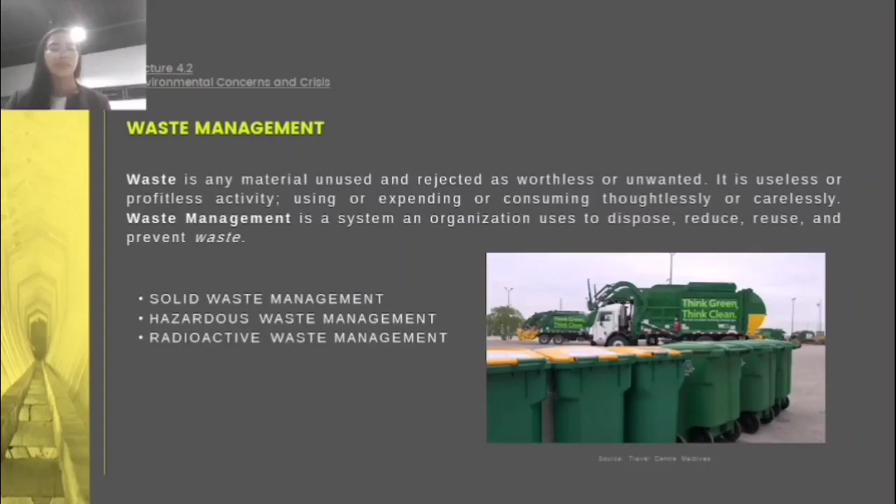So there are three classifications of waste management: solid waste management, hazardous waste management, and lastly, radioactive waste management. So what is solid waste? It is non-liquid, non-soluble materials ranging from municipal garbage to industrial waste that contain complex and sometimes hazardous substances, where solid waste management is a management system to utilize solid waste in the most effective combination of management options to handle waste or waste streams within the confines of applicable regulations.

So, such solid waste is often called municipal solid waste, or MSW, and consists of all the solid and semi-solid materials discarded by a community. MSW comes from residential, commercial, institutional, and industrial sources. Residential waste constitutes the bulk, which is 56.7% of MSW, and includes kitchen scraps, yard waste, paper and cardboard, glass bottles, plastic containers, and even sandbags.

Then, commercial sources, which include commercial establishments and public or private markets, contribute 27.1%. In some regions, about two-thirds of commercial waste comes from the latter, and institutional sources such as government offices, educational and medical institutions account for about 12.1%, while the remaining 4.1% is waste coming from the industrial or manufacturing sector.

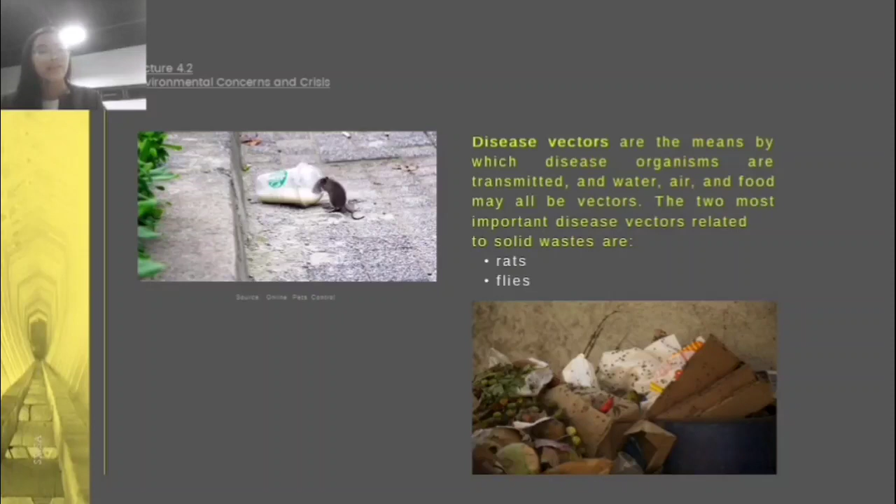So therefore, the relationship between solid waste and human disease is intimate and obvious but difficult to prove. If, for instance, a rat is sustained by an open dump and that rat sustains a flea that transmits murine typhus to a human, the absolute proof of the pathway would require finding the particular rat and flea, an obviously impossible task.

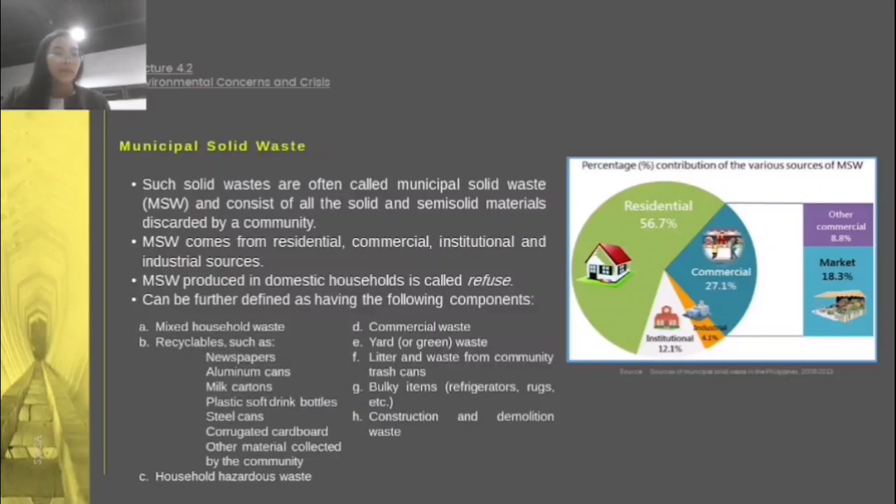So, the characteristics of municipal solid waste involve gross composition, moisture content, analysis of particle size, identification of individual components that make up the MSW, and the density of solid waste. Refuse management depends on both the characteristics of the site and the characteristics of MSW itself. MSW produced in domestic households is also known as refuse, so sometimes refuse management and municipal solid waste can have the same meaning.

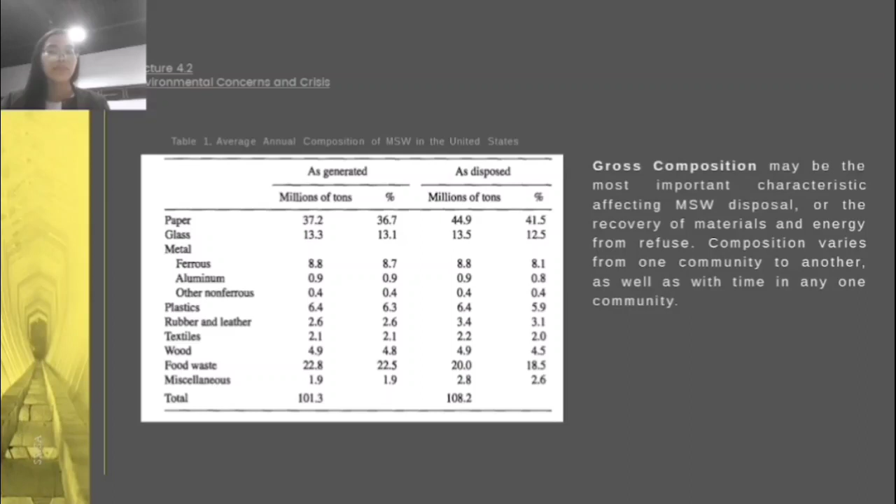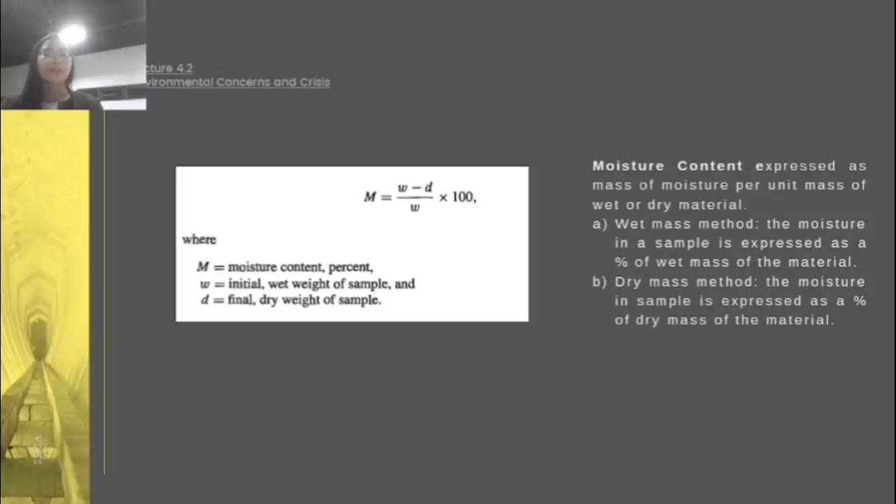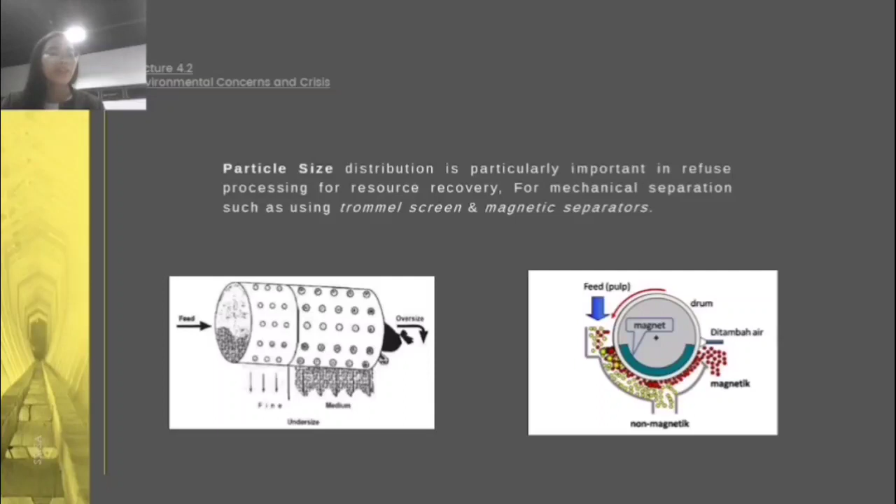So gross composition may be the most important characteristic affecting MSW disposal. Moisture content is expressed as the mass of moisture per unit mass of wet or dry material. Then the particle size distribution is particularly important in refuse processing for resource recovery, for mechanical separation, such as using trommel screens and magnetic separators.

The fourth one would be the chemical composition of typical refuse, which uses both proximate and ultimate analysis in the combustion of MSW. Then lastly, one of the characteristics of MSW is the density, which varies greatly with geographic location, season of the year, and length of time of storage.

Collections are facilitated by using containers that are emptied into the truck with a mechanical or hydraulic mechanism. So these are the different transportations that are used to collect solid waste, for instance, the garbage grinder, the kitchen garbage compactor, the transfer station, and many more.

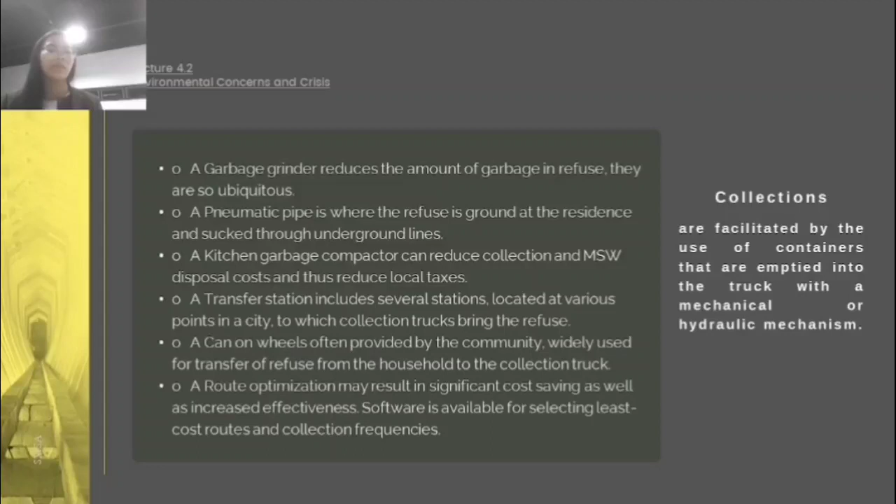So, processing and beneficial use. Processing reduces the volume of materials to be landfilled and can create products such as fuels, oils, and steam for electricity generation. And beneficial use means the reuse of solid waste as a substitute for raw material in manufacturing, as construction material, as a fuel, or as an agronomic soil amendment.

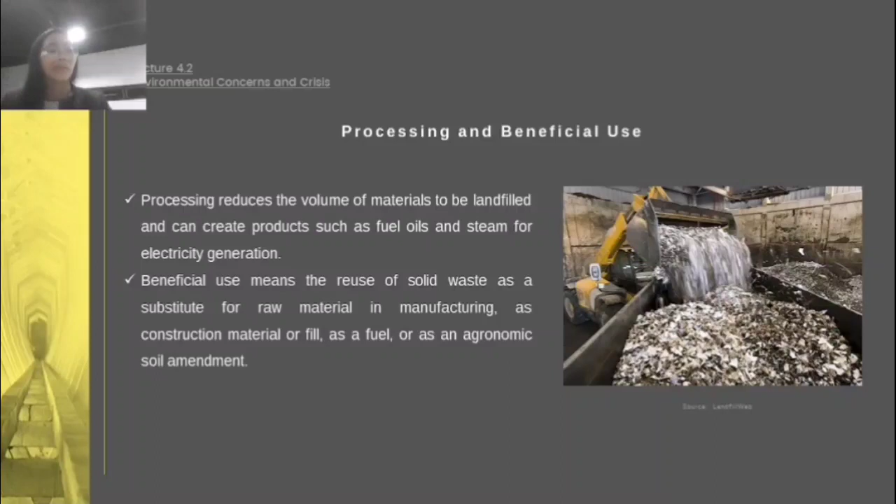So the solid waste problem has three facets: the source, collection, and disposal. So the first is perhaps the most difficult, and a new economy of reduced waste, increased longevity instead of planned obsolescence, and thriftier use of natural resources is needed.

So one of the subtopics of solid waste management would be solid waste disposal, wherein the disposal of solid waste is defined as the placement of the waste so that it no longer impacts society or the environment. The wastes are either assimilated so that they can no longer be identified in the environment, as by incineration to ash, or they are hidden well enough so that they cannot be readily found. So solid waste may also be processed so that some of its components may be recovered and used again for beneficial purposes.

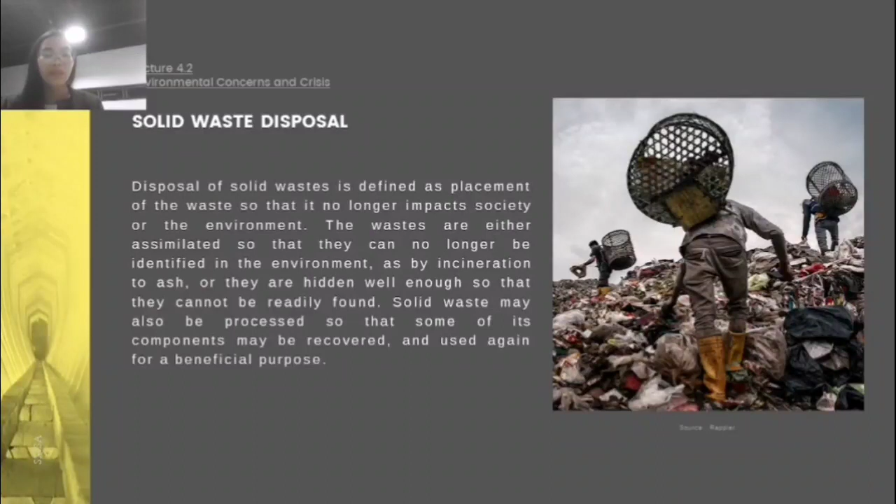So it is regarded as the least preferred method of managing solid waste, although it plays an important role in dealing with residual waste. There are only two realistic options for disposal. They are disposal in the ocean and on the land, and the environmental damage done by ocean disposal is now understood. So the term sanitary landfill was first used for the method of disposal employed in the burial of waste ammunition and other material after World War II.

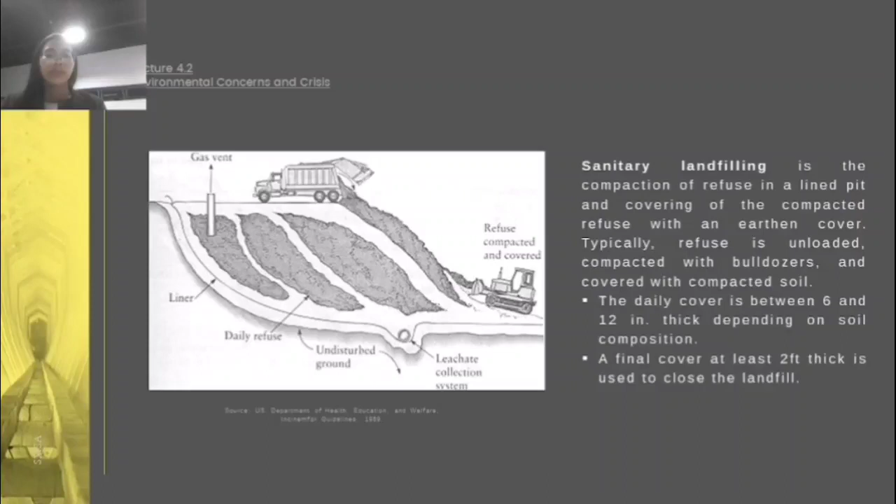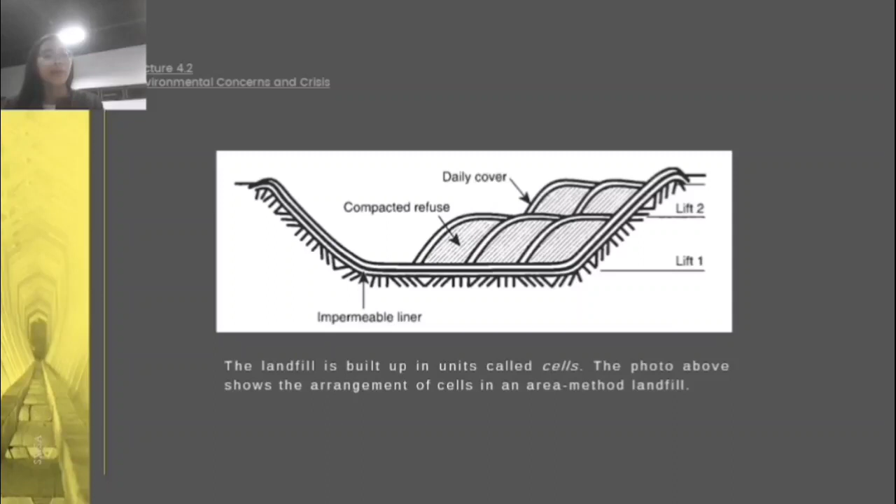They are called cells. So another aspect of solid waste disposal is siting landfills, which is rapidly becoming the most difficult stage of the process since few people wish to have landfills in their neighborhood. In addition to public acceptability, considerations include the drainage, the wind, the distance from the collection, the size, rainfall patterns, soil type, depth of the water table, treatment of leachate, and proximity to airports. And lastly would be the ultimate use of the landfill site.

In modern civilization, however, adequate disposal is becoming increasingly difficult. The disposal methods discussed in this topic are only partial solutions to the solid waste problem. Another solution would be to redefine solid waste as a resource and to use it to produce usable goods. And this idea is explored in the following slides.

So the defining objective of solid waste disposal is the placement of solid waste so that it no longer impacts society or the environment. At one time, this was fairly easy to achieve. Dumping solid waste outside the city was also quite adequate. But again, the disposal methods discussed here are only partial solutions to the solid waste problem, and there are other solutions that could be implemented, such as the 3 Rs, which are reuse, reduce, recycle.

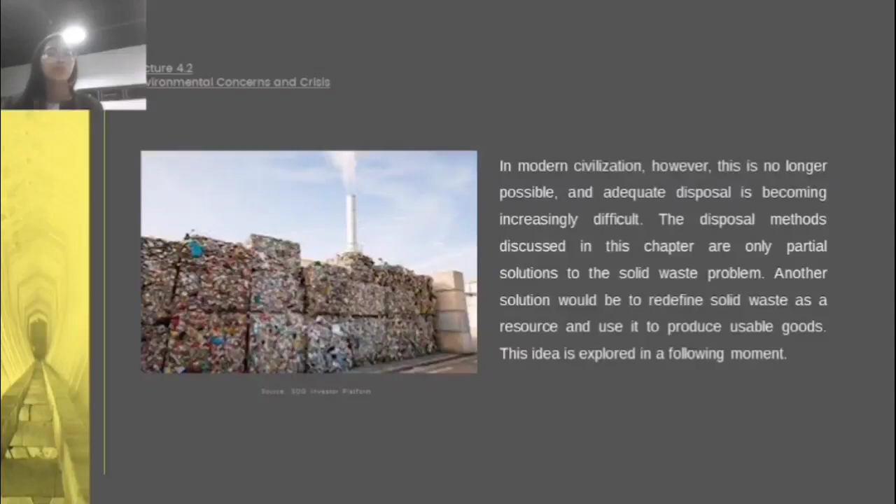Reuse, recycling, and resource recovery. So waste generation has increased exponentially with the rise of the population's economic situation and the materialistic nature of society. So this makes the selection of solid waste disposal sites more difficult and problematic. So as a result, society's interest in reuse, recycling, and recovering materials from waste has grown. However, the differences between these three elements are oftentimes confusing and sometimes misused.

So when we say reuse, it involves either the voluntary continued use of a product for a purpose for which it may not have been originally intended, or the continuous use of the product itself. So it is the act of taking old items that you might consider throwing away and finding a new use for them, using resources in a new way once we have finished using them for their original purpose. So an example of this are these empty cans. Instead of throwing these items out, we can think of a new way we could use them. For example, we can use them as a plant holder or as a utensil holder.

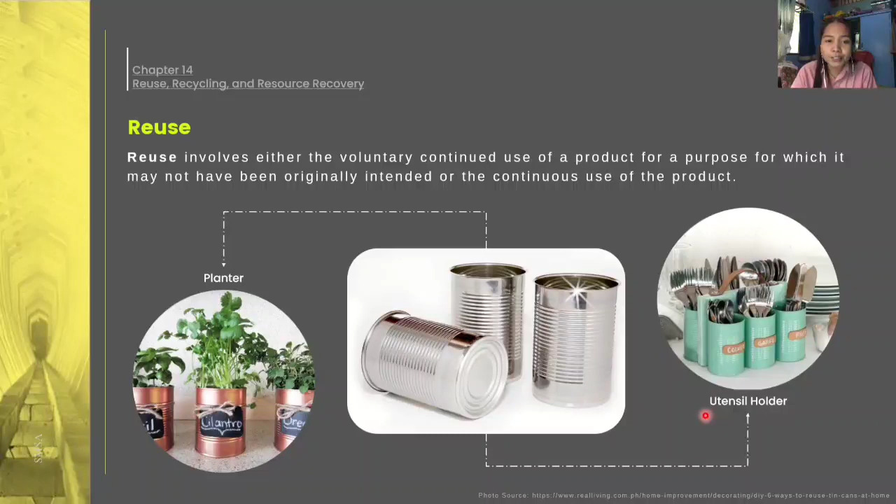So the second element is recycling, which is probably the most well-known and well-understood among these three. So it is the act of turning waste into a new substance or product, in which the materials are carefully separated and later processed into other goods which will be returned to the industrial sector. So the recycling process requires the participation of the public, since the public must perform the separation process.

So there are two ways that can be used to increase public participation in recycling, which are the regulatory or democratic. So when we say regulatory, the government has the power to dictate that only separated materials will be picked up at each household.

However, in democratic countries like the United States, this type of approach has limited success since it causes public resentment. On the other hand, the democratic approach appeals to the sense of community and to growing concern about environmental quality. However, householders respond positively to surveys about prospective recycling programs rather than actively participating in source

or waste separation. So based on the survey results, it can be concluded that participation in source separation can be increased by making source separation easy. So an example of this is Seattle, which is a city in Washington. They have 100% participation in its household recycling program.

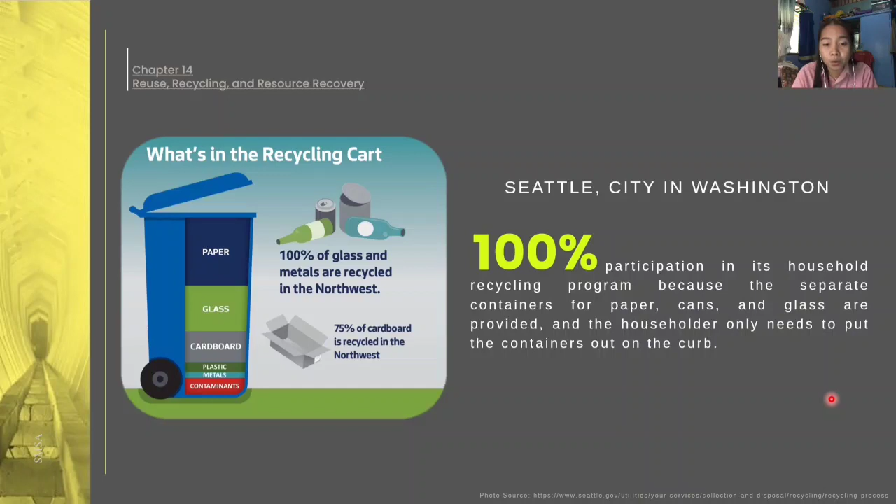So in the city of Albuquerque, they sell large plastic bags to hold aluminum and plastic containers for recycling. However, these initiatives are costly for each household since each household must buy plastic bags which cost 10 cents each just for recycling purposes.

So no matter what initiatives a state or a city could make, we can only say that a recycling program is a success or not through the availability of markets that would buy these separated recyclable materials. So for example, there are markets that buy recyclable materials, such as junk shops. So it is a necessity that a recycling program should be linked to a market for the recyclable materials collected. Otherwise, these materials will still end up in the landfill site.

So now the question is, how can markets for recyclable materials be created? Simply, they can be created by public demand. So the third element is recovery. Recovery is using mixed waste refuse as an input material to create valuable products as new outputs. There are various processing steps to create new material from mixed refuse waste.

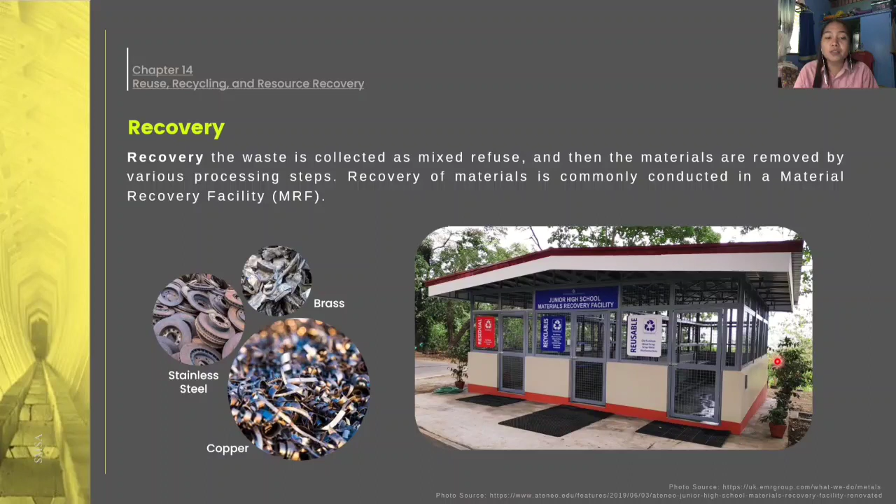So the first step in a solid waste processing facility for recovering material is size reduction, or what we call shredding. Shredding is a brute force breaking of particles of refuse by swinging hammers in an enclosure. There are two types of shredders used in solid waste processing: vertical and horizontal hammer mills.

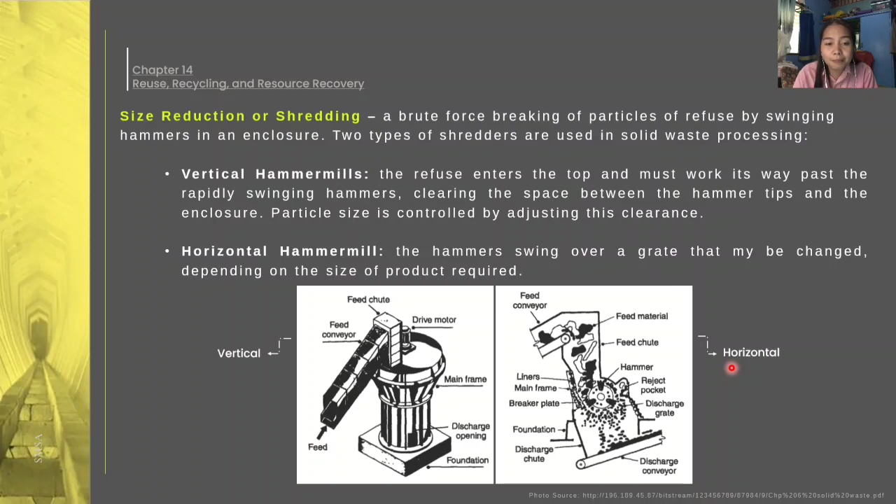So next is shredder performance and design. The performance of a shredder is assessed by the degree of particle size reduction achieved, then compared with the cost in power and shredder wear.

So the particle size distribution of a non-homogeneous material such as municipal solid waste can be expressed using the Rosin-Rammler distribution function, expressed in equation number 1, where y is the cumulative fraction of particles, n is a constant, and x sub c is a characteristic particle size.

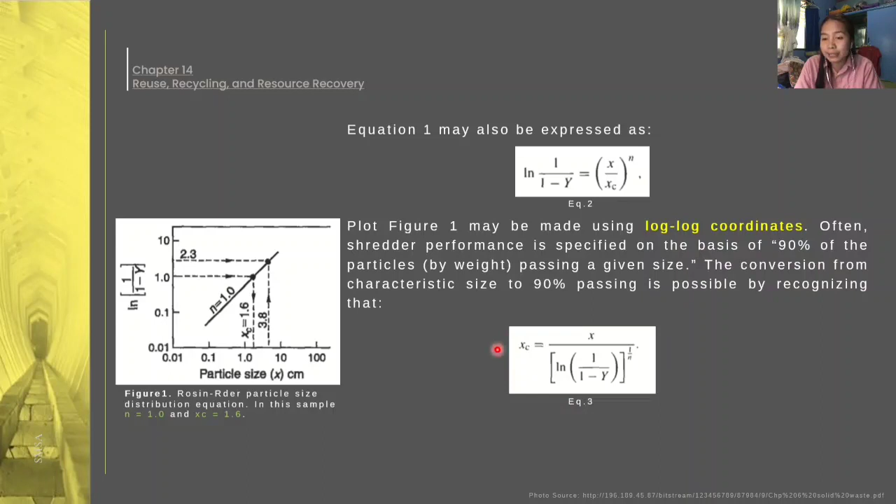So in this sample, the n as a constant is equal to 1 and the x sub c is equal to 1.6. So this plot, figure 1, may be made using log-log coordinates. Often, shredder performance is specified on the basis of 90% of the particles passing a given size. The conversion from characteristic size to 90% passing is possible by recognizing this equation number 3.

A semi-empirical equation developed by Bond is also used to estimate the power requirements for shredders. This equation number 4 can estimate the power required for shredders. W is the specific energy required to reduce a unit weight of material 80% finer than some diameter L sub f to a product 80% finer than some diameter L sub p.

Where W sub i is the Bond work index, which can be seen in table 1. Table 1 shows the typical Bond work indices. Each material depends on location, but in this table most are materials present in Washington. The factor 10 here also corrects for the dimensions. Typical values of the Bond work index for MSW and other specific materials are given in this table.

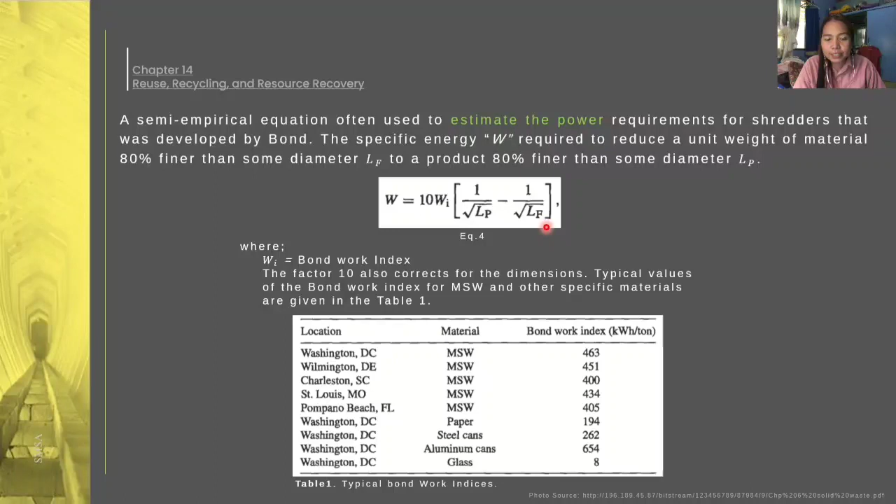Both L sub p and L sub f must be in micrometers. Example number 1: determine the power required for shredding the waste with the following particulate. L sub p is equal to 2 centimeters, L sub f is equal to 30 centimeters, and the Bond work index is 400. Also, determine the power for processing 100 tons per day of waste.

The solution uses equation number 4. Energy, denoted as W, is equal to the constant 10 multiplied by the Bond work index, 400, times 1 over the square root of L sub p minus 1 over the square root of L sub f. Since L sub p and L sub f are in centimeters, we need to convert them into micrometers: 0.02 times 10 to the 6th and 0.3 times 10 to the 6th. Calculating, we get 20.98 kilowatt hours per ton.

For the second question, to determine the power for processing 100 tons per day of waste, we multiply W by 100 tons per day, where one day is 24 hours. So 20.98 kilowatt hours per ton multiplied by 100 tons divided by 24 hours gives a power of 87.42 kilowatts. Don't forget that we should always convert L sub p and L sub f into micrometers.

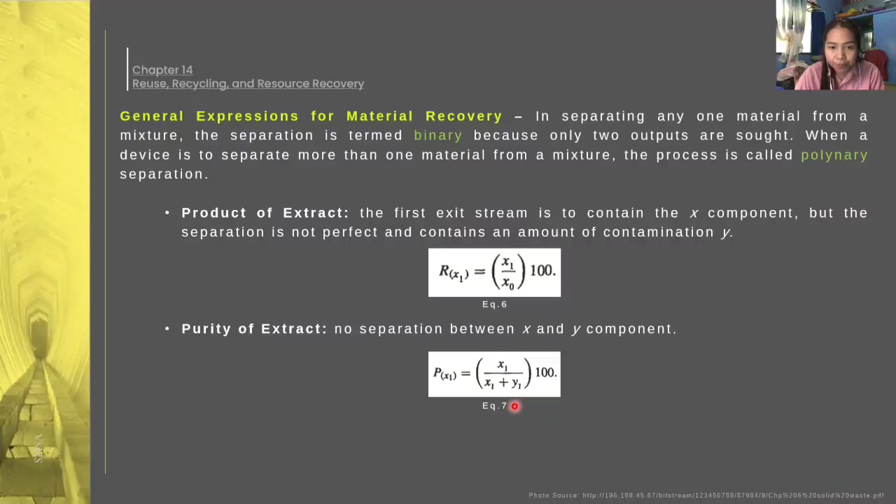The percent of x recovered in this first stream, r x sub 1, may be expressed as equation number 6. In cases where there has been no separation of the x and y components in the mixture, the stream's purity of extract may be defined by the 7th equation. However, if a separator extracts only a small amount of pure x and more contamination of y, then the performance of a material separator is assessed by both recovery and purity. This may be characterized by an additional parameter called the separator efficiency.

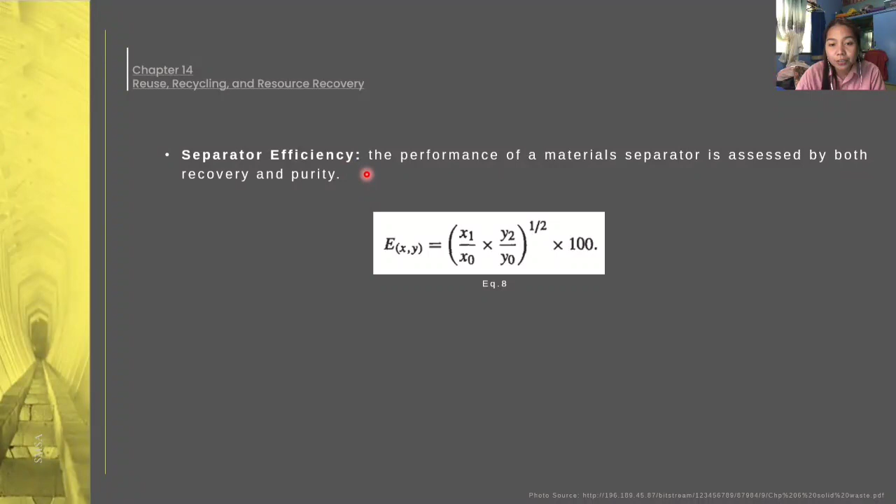For example, a binary separator, a magnet, is to separate a product, ferrous materials, from a feed stream of shredded refuse. The feed rate to the magnet is 1000 kg per hour and contains 50 kg of ferrous materials. The product stream weighs 40 kg, of which 35 kg are ferrous materials. What is the percent recovery of ferrous materials, their purity, and the overall efficiency?

Using the product or extract formula, given these numerical values, we just plug them in.

So the product of extract is equal to x sub 1 over x sub 0 multiplied by 100. So 35 kilograms divided by 50 kilograms times 100, so the units cancel out. So the product of extract now is equal to 70%. Next is the purity of extract: x sub 1 divided by x sub 1 plus y sub 1, multiplied by 100. So we have a purity of extract of 88%.

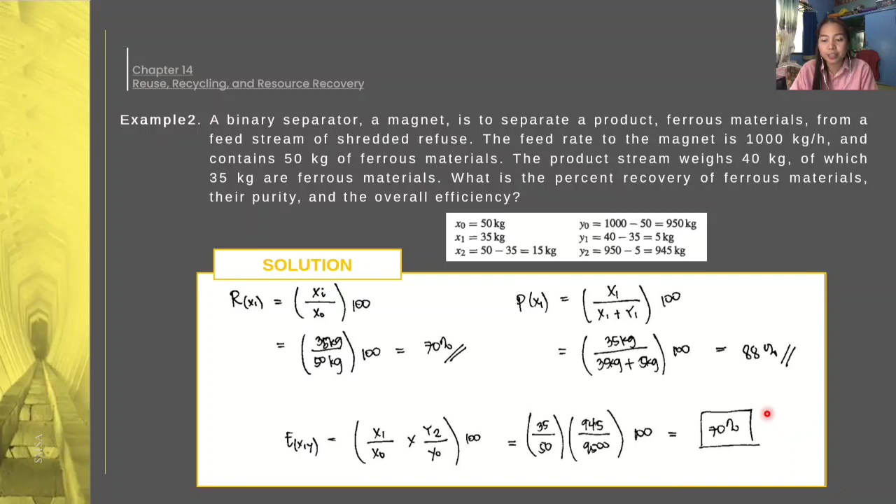Screens can separate materials solely by size, so they do not identify the material by any other property. Screens are most often used in materials recovery as a classification step before a material separation process. An example of the most widely used screen in materials recovery is the trommel. The trommel behaves in 3 different ways.

First is cascading, which is at low speed, so the material simply rolls back. Cataracting is at higher speed, in which centrifugal force carries the material up the side and it falls back. The third way is centrifuging, at even higher speed, in which material adheres to the inside. So we have here an example.

Find the critical speed for a 3-meter diameter trommel. Using equation number 9, we can compute the critical speed. Given the 3-meter diameter, the formula uses the radius. Since diameter is given, we divide it by 2 to get the radius and convert it into centimeters, since the radius of the drum must be in centimeters in the formula.

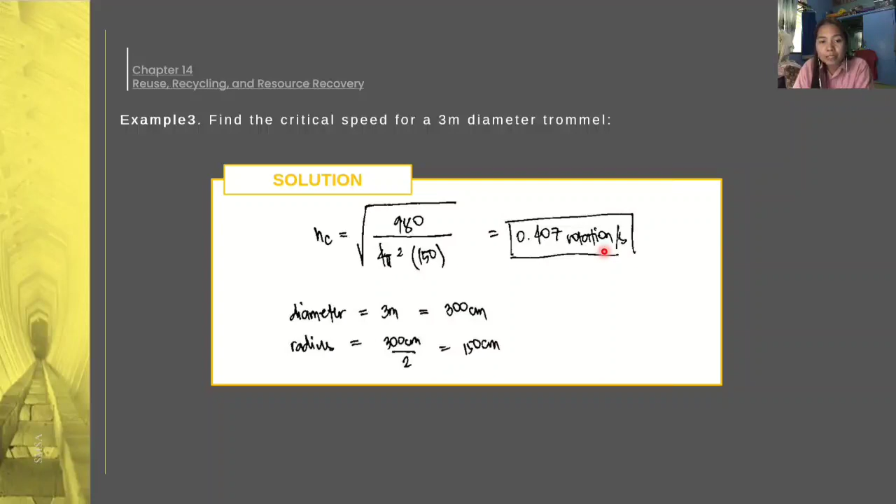Next is air classifiers. Materials may be separated by their aerodynamic properties. In shredded MSW, or municipal solid waste, most of the aerodynamically less dense materials are organic, and the denser materials are inorganic. So we can conclude that air classification can produce a refuse-derived fuel, or RDF, superior to unclassified shredded refuse. Here's figure 3, the air classifier.

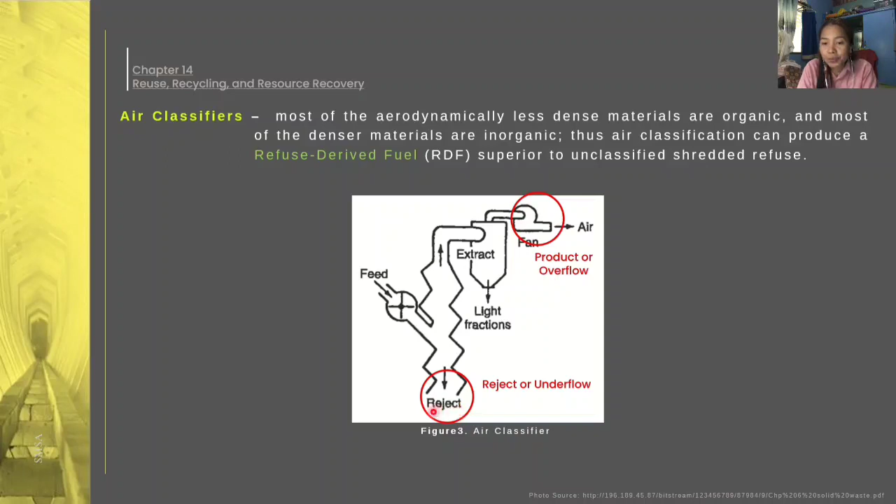We can see here the fraction keeping with the airstream is what we call the product or overflow. But if the fraction falls out of the bottom, it is a reject or underflow. There are two factors that influence the recovery of organic materials by air classification.

First, not all organic materials are aerodynamically less dense, nor are all inorganic materials denser. So complete separation of organic from inorganic material can never occur regardless of the chosen air velocity. Second, perfect classification of more and less dense materials is difficult because of the stochastic nature of material movement in the classifier.

Next are the magnets. Ferrous material may be removed from refuse using magnets, which continually extract the ferrous material and reject the remainder. One example of a magnet that removes ferrous materials is the belt magnet. It enhances the recovery of ferrous material, but its placement can decrease the purity of the product.

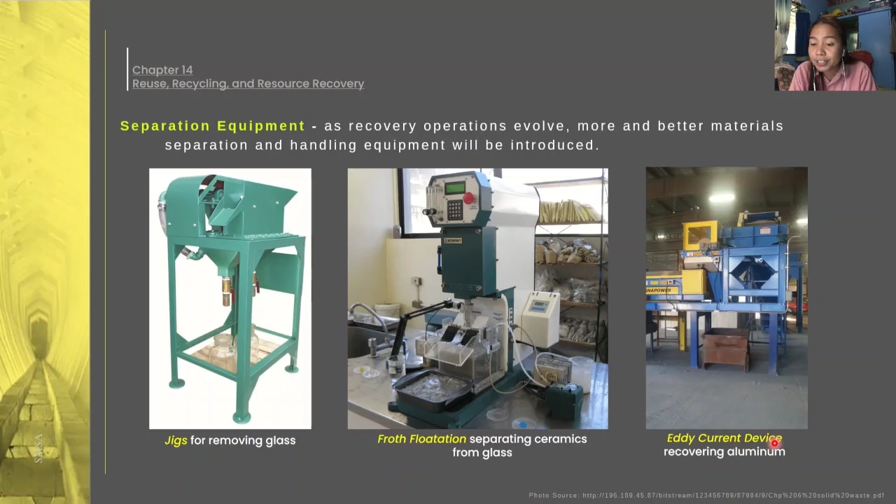Next is separation equipment. As recovery operations evolve, more and better material separation and handling equipment will be introduced. Here are different examples of separation equipment. These include jigs, used for removing glass, froth flotation for separating ceramics from glass, and eddy current devices for recovering aluminum materials.

Next is energy recovery from the organic fraction of municipal solid waste, or MSW. The organic portion of waste makes an excellent secondary fuel called refuse-derived fuel. It can be used in current electric generating facilities as shredded and classified fuel, either as a fuel substitute for coal or as the only fuel in particular boilers.

Once hydrocarbons are oxidized with other components of the fuel such as nitrogen and sulfur, different chemical reactions can form. Nitrogen dioxide is an important component in the formation of photochemical smog. However, if particles form into sulfur dioxide, it can damage both human health and vegetation. How much more if sulfur trioxide reaction is formed - this is where acid rain forms, by the reaction of these chemical compounds.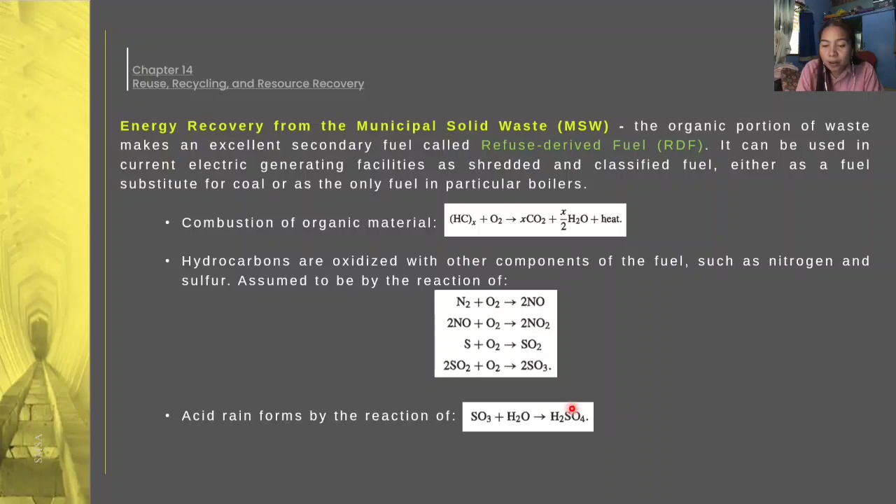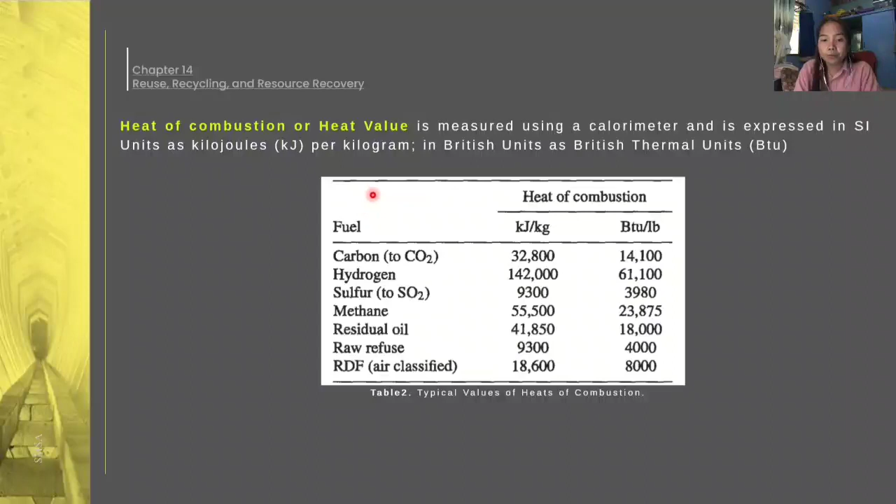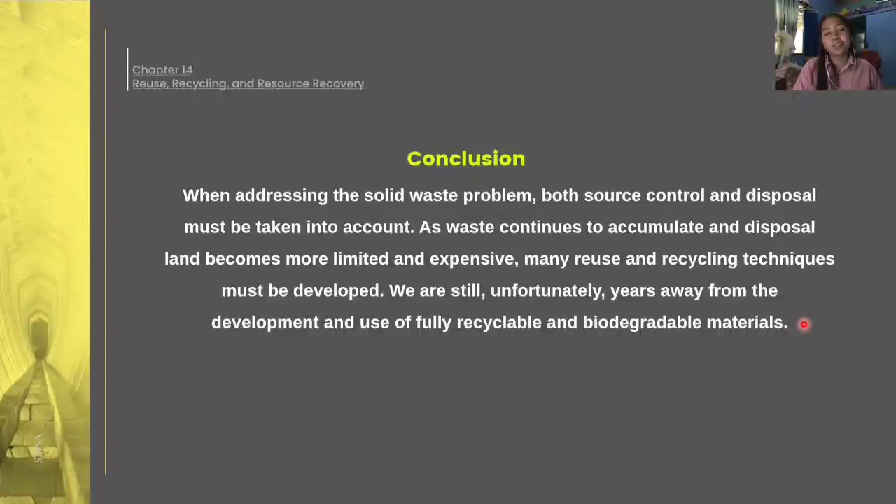Topic 4: Environmental Concerns and Crises. Hazardous Waste Management. Over the years, the term hazardous has evolved into a confusing setting as different groups advocate many criteria for classifying a waste as hazardous. Different agencies use descriptions such as toxic, explosive, and radioactive to label a waste as hazardous. Hazardous waste is defined by the degree of instability, corrosivity, reactivity, or toxicity. This definition includes acids, toxic chemicals, explosives, and other harmful or potentially harmful waste.

Bioconcentration is the ability of an organism to accumulate a chemical from the ambient environment. For instance, a fish living in a river contaminated by pharmaceutical waste might intake high levels of human hormones from the water. Lethal dose 50 is a calculated dose of a chemical substance expected to kill 50% of a population exposed through a route other than respiration. Lethal concentration 50 is a calculated concentration of a chemical substance that, when following the respiratory route, will kill 50% of a population during a 4-hour exposure period. Phytotoxicity is the ability of a chemical substance to cause poisonous reactions in plants.

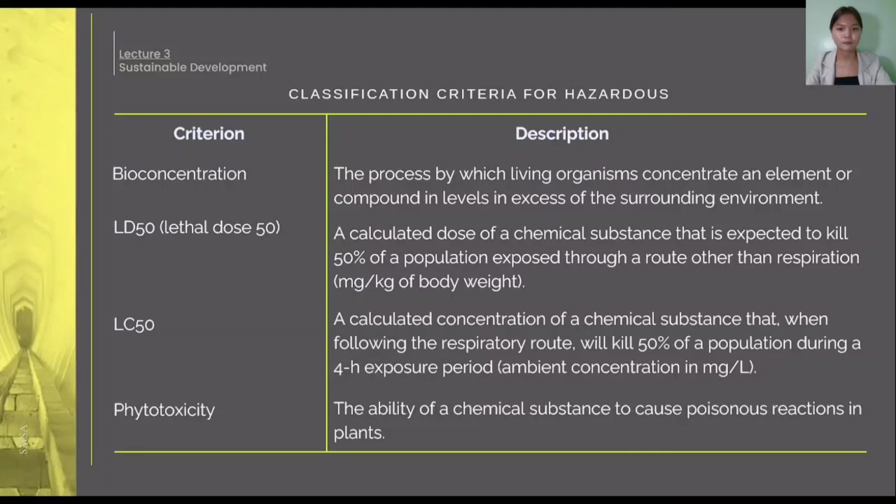In the United States, more than 60 million metric tons by weight of hazardous waste are generated annually. More than 60% is generated by the chemical and allied industry. The machinery, primary metals, paper and glass products industries each generate between 3 and 10% of the nation's total. Furthermore, in the Philippines, according to the JICA study on hazardous waste management, approximately 280,000 tons of hazardous waste are generated each year by the officially registered 719 hazardous waste generators.

Waste processing and handling are key concerns as hazardous waste begins its journey from the generator site to a secure long-term storage facility. Ideally, the waste can be stabilized, detoxified, or somehow rendered harmless in a treatment process similar to the following: chemical stabilization or fixation, volume reduction, waste segregation, detoxification, degradation, and encapsulation.

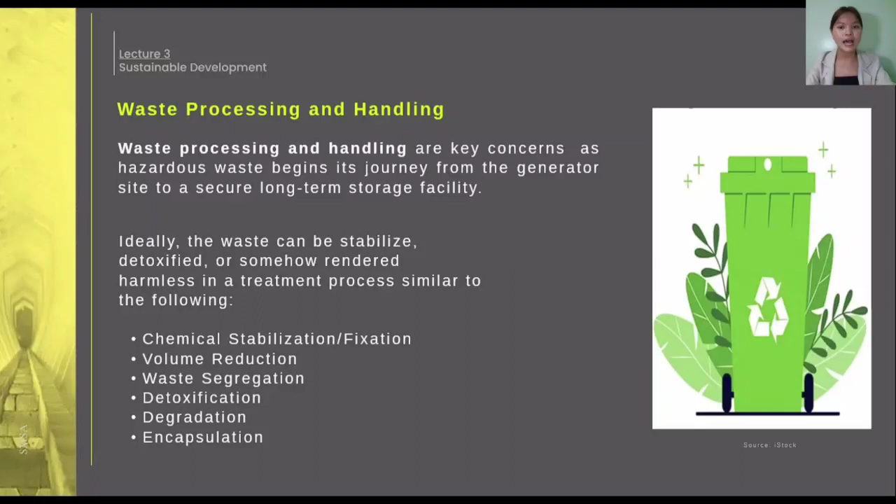For chemical stabilization or fixation, waste sludge is combined with chemicals, pumped onto land, and then solidifies over the course of a few days or weeks. Pollutants like heavy metals may get chemically bonded in insoluble complexes, creating a chemical nest that traps the waste. Vast amounts of diluted trash can be treated via chemical stabilization, which is an alternative to excavating and transporting large quantities of hazardous garbage.

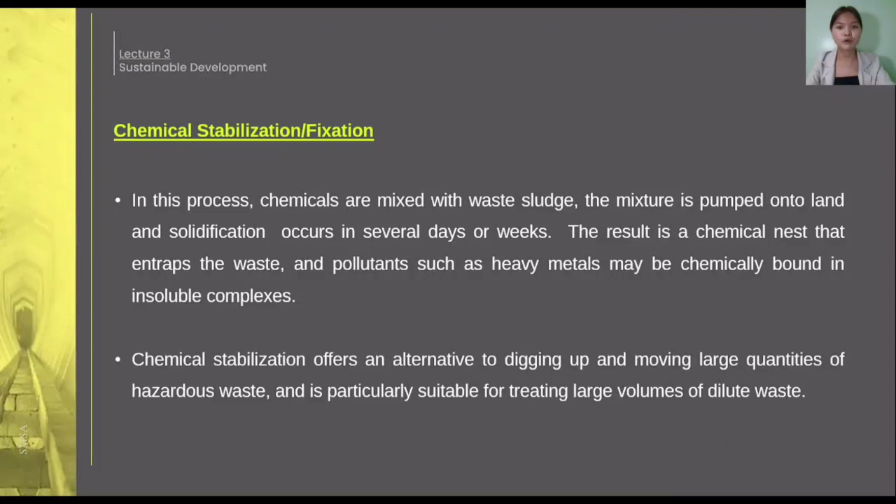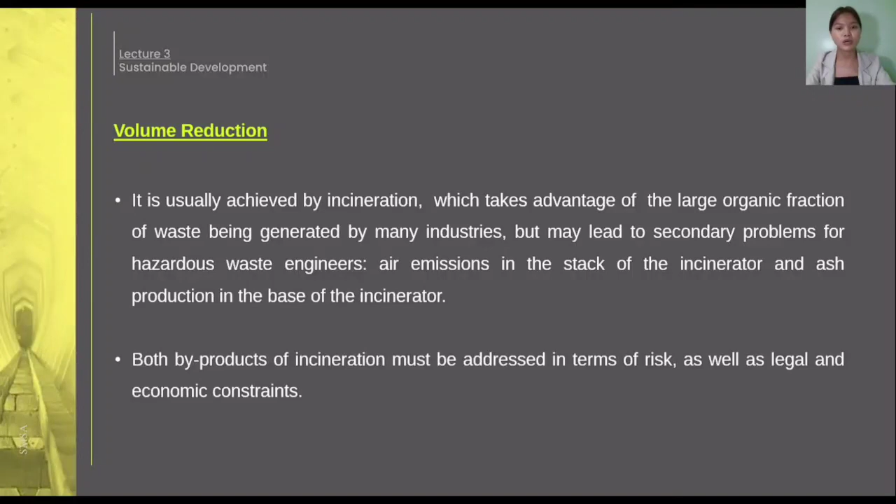For volume reduction, it is usually achieved by incineration, which takes advantage of the large organic fraction of waste generated by many industries, but may lead to secondary problems for hazardous waste engineers, like air emissions in the stack of the incinerator and ash production at the base of the incinerator. Both byproducts of incineration must be addressed in terms of risk as well as legal and economic constraints.

For waste segregation, before any shipment to a processing or long-term storage facility, wastes are segregated by type and chemical characteristics. Similar wastes are grouped in a 55-gallon drum or group of drums, segregating liquids such as acids from solids such as contaminated laboratory clothing and equipment.

Waste segregation is generally practiced to prevent undesirable reactions at disposal sites and may lead to economies of scale in the design of detoxification or resource recovery facilities.

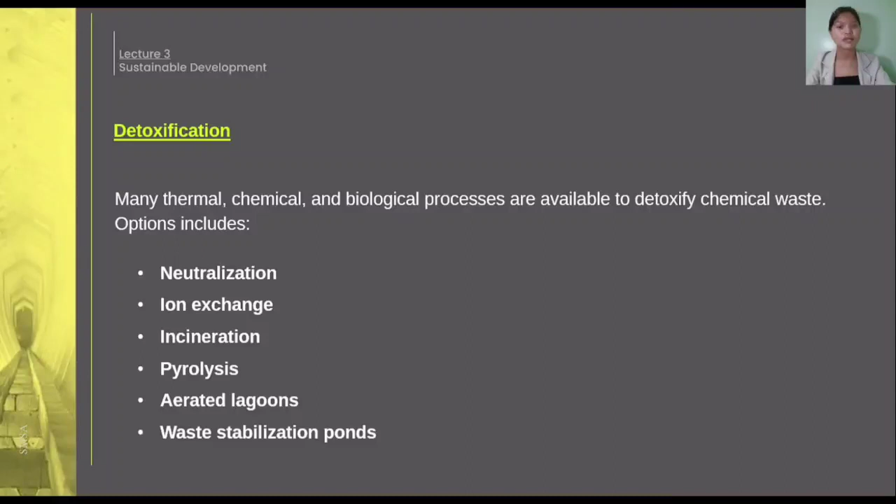The next treatment is detoxification, the removal of harmful or unwanted components from waste. Many thermal, chemical, and biological processes are available to detoxify chemical waste. Options include neutralization, ion exchange, incineration, pyrolysis, aerated lagoons, and waste stabilization ponds. These techniques are specific, particularly ion exchange. Obviously, it does not work for every chemical, and some forms of heat treatment may be prohibitively expensive for sludge with high water content.

Next is degradation. Chemical degradation is a form of chemical detoxification. Waste-specific degradation processes include hydrolysis, which destroys organophosphorus and carbonated pesticides, and chemical dechlorination, which destroys some polychlorinated pesticides.

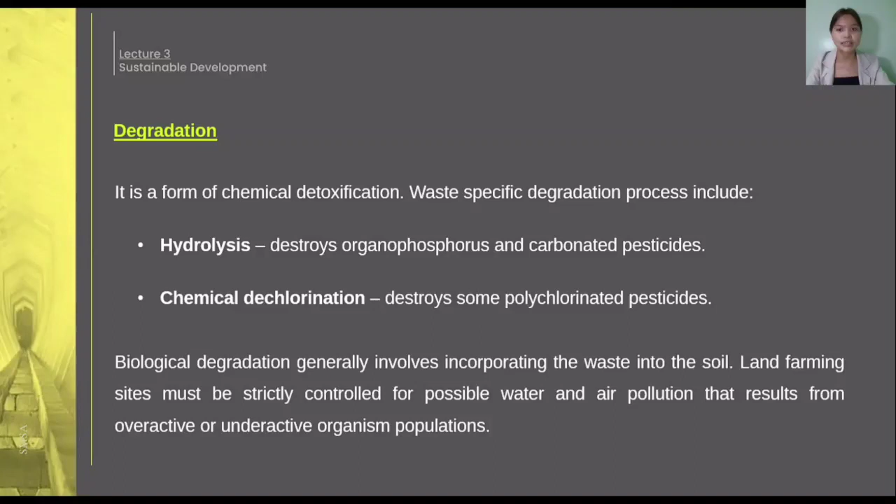Biological degradation generally involves incorporating the waste into the soil. Land farming, as it has been termed, relies on healthy soil microorganisms to metabolize the waste components. Land farming sites must be strictly controlled for possible water and air pollution that results from overactive or underactive organism populations. And the last technique is encapsulation.

Hazardous waste can be encapsulated with a variety of materials. The standard 55-gallon steel drum is one option, but other materials like clay, plastics, and asphalt can be used to solidify the waste. Several layers of various materials, such as an inch or more of polyurethane foam to stop corrosion, are frequently advised for the exterior of the drum.

Hazardous waste is transported across the nation on trucks, rail flat cars, and barges. Haulers' major concerns over hazardous waste include operator training, insurance coverage, and special registration of transport vehicles. Handling precautions include workers wearing gloves, face masks, and coveralls, as well as registration of handling equipment to control future use of the equipment. The term hazardous waste manifest.

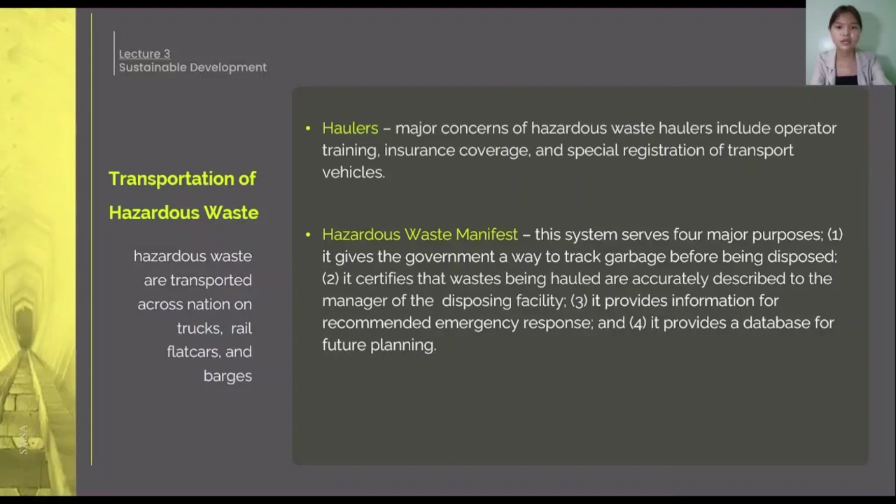The concept of a cradle-to-grave tracking system has long been considered key to proper management of hazardous waste. Copies of the manifest are submitted to generators and state officials so all parties know that each waste has reached its desired destination in a timely manner. This is an example illustration of a hazardous waste manifest.

This system serves four major purposes. First is to provide the government with a means of tracking waste within a given state and determining quantities, types, and locations where the waste originates and is ultimately disposed. Second is to certify that waste being hauled is accurately described to the manager of the disposing facility. Third is to provide information for recommended emergency response if a copy of the manifest is not returned to the generator. And lastly is to provide a database for future planning within a state.

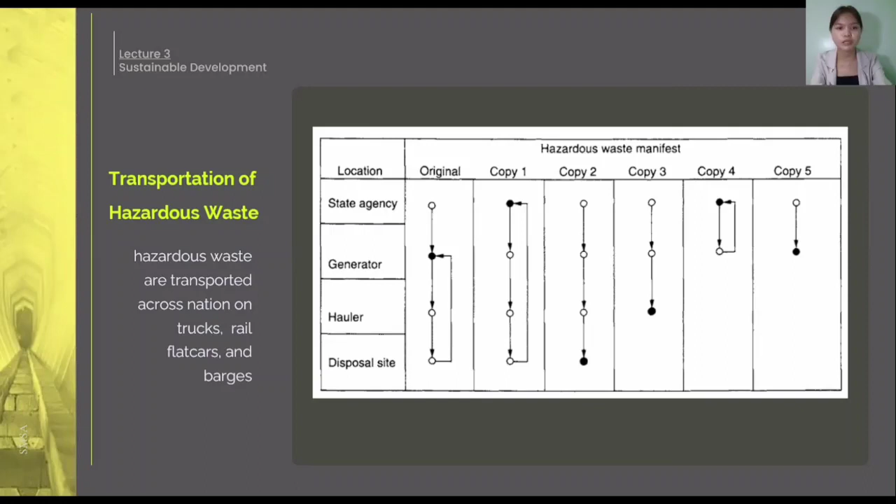Packaging. Packages in terms of design and construction are prescribed according to regulation, whether they are considered waste or usable materials. Corrosive material, flammable material, volatile material, material that if released would be toxic by inhalation, and any material that if released during transportation would pose a threat to human health and safety or to the environment must be packaged for transportation properly.

For labeling and placarding, before any waste is transported from a generating site, each container is labeled and the transportation vehicle is placarded. Multiple labeling is desirable if, for example, a waste is both explosive and flammable. These labels and placards warn the general public of possible dangers and assist emergency response teams as they react in the event of a spill or accident along a transportation route.

Accident and incident reporting. Accidents involving hazardous waste must be reported immediately. Accident reports that are submitted indicate the amount of materials released, the hazards of these materials, and the nature of the failure that caused the accident.

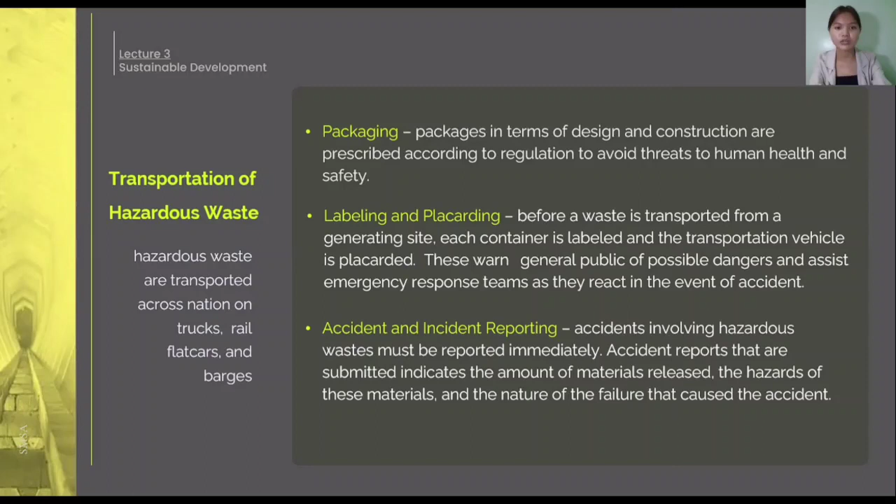For recovery alternatives, this is based on the premise that one person's waste is another person's prize. So what may be a worthless drum of electroplating sludge to the plating engineer may be a silver mine to an engineer skilled in metals recovery. In hazardous waste management, two types of systems exist for transferring this waste to a location where it is viewed as a resource: hazardous waste materials transfers and hazardous waste information clearinghouses.

An industrial process typically has three outputs. First is a principal product which is sold to a consumer. Second is a useful byproduct available for sale to another industry. And lastly is waste, which is historically destined for ultimate disposal.

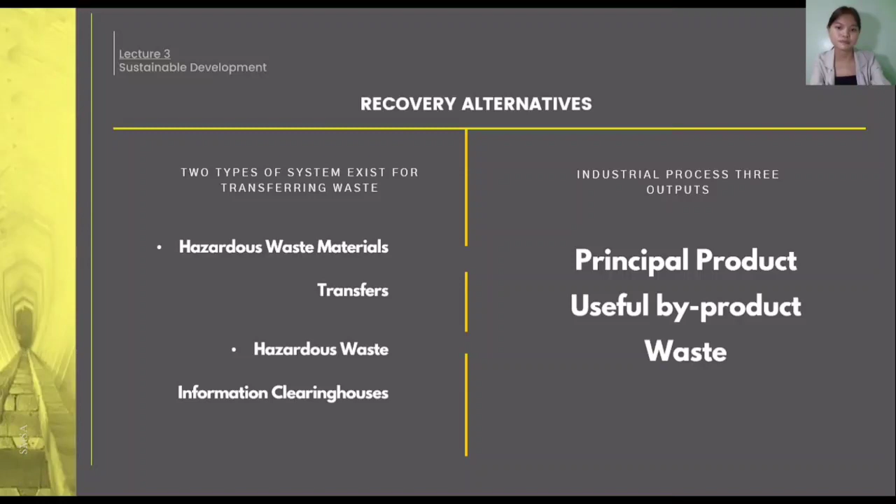Clearinghouse: the pure clearinghouse has limited function. These institutions offer a central point for collecting and displaying information about industrial wastes. Their goal is to introduce interested potential trading partners to each other through the use of anonymous advertisements and contacts.

Clearinghouses generally do not seek customers, negotiate transfers, set prices, process materials, or provide legal advice to interested parties. One major function of a clearinghouse is to keep all data and transactions confidential so trade secrets are not compromised.

Clearinghouses are also generally subsidized by sponsors, either trade or governmental, so often they are only able to operate in the short term.

In comparison with the clearinghouse concept, a pure materials exchange has many complex functions, unlike the clearinghouse which has only limited functions. A transfer agent within the exchange typically identifies generators of waste and potential users of the waste. The exchange will buy or accept waste, analyze its chemical and physical properties, identify buyers, reprocess the waste as needed, and sell it at a profitable price.

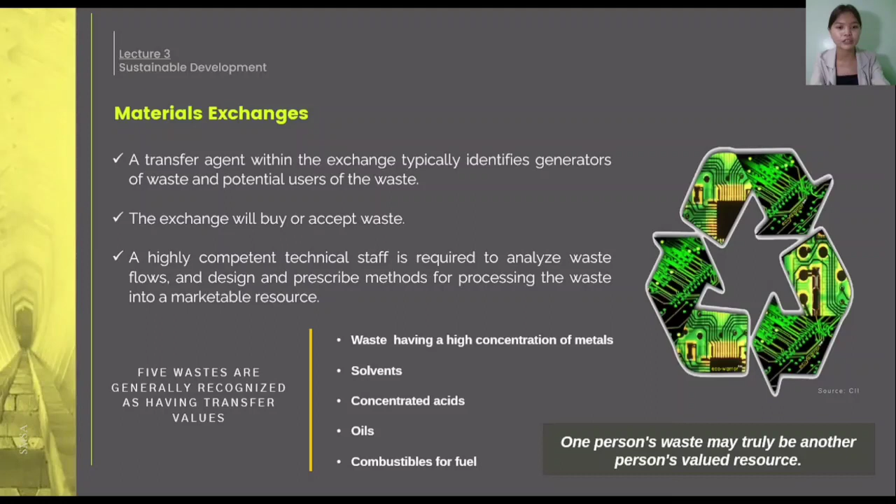There are five wastes generally recognized as having transfer value. First is waste having a high concentration of metals. Second is solvents. Third is concentrated acids. Fourth is oils. And lastly, combustibles for fuel. The materials exchange concept revolves on this saying: one person's waste may truly be another person's valued resource.

Hazardous waste management facilities: siting considerations. A wide range of factors must be considered in siting hazardous waste management facilities. All of the relevant ologies must be considered, such as hydrology, climatology, geology, and ecology, as well as current land use, environmental health, and transportation.

For hydrology, hazardous waste landfills should be located well above historically high groundwater tables. Hydrologic considerations limit direct discharge of waste into groundwater or surface water supplies.

For climatology, hazardous waste management facilities should be located outside the paths of recurring severe storms. Hurricanes and tornadoes disrupt the integrity of landfills and incinerators and cause immediate catastrophic effects on the surrounding environment and public health in the region of the facility.

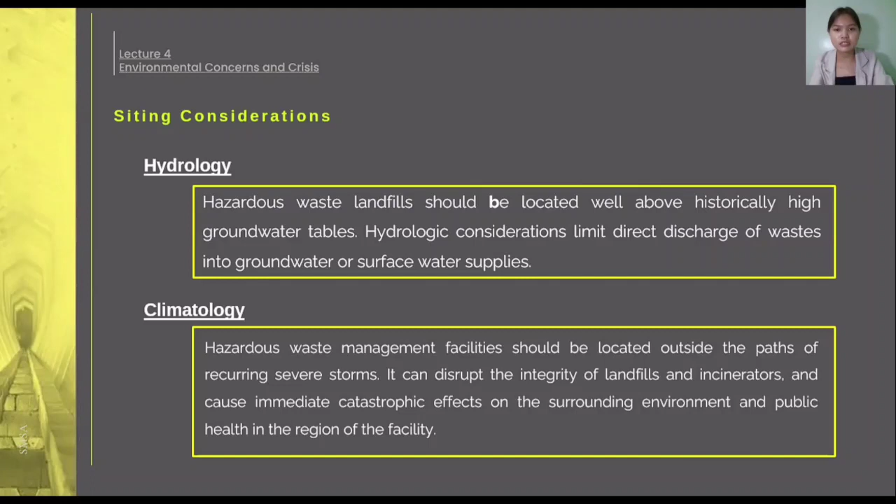For geology, it must be considered that a disposal or processing facility should be located only on stable geologic formations. Impervious rock, which is not littered with cracks and fissures, is an ideal final liner for hazardous waste landfills.

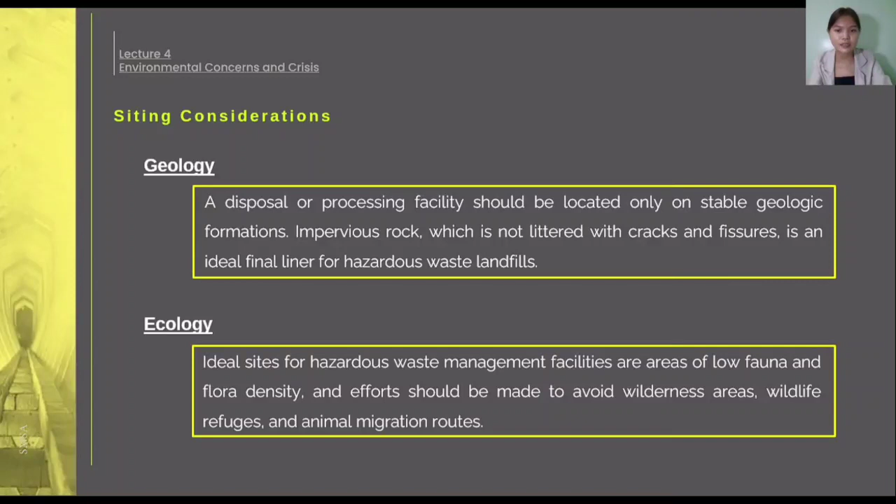In ecology, ideal sites for hazardous waste management facilities are areas of low fauna and flora density, and efforts should be made to avoid wilderness areas, wildlife refuges, and animal migration routes. Areas with unique plants and animals, especially endangered species and their habitat, should also be avoided.

For alternative land use, areas with high recreational use potential should be avoided because of the increased possibility of direct human contact with the waste.

For transportation considerations, roads to the facilities should be accessible by all-weather highways to minimize spills and accidents during periods of rain and snowfall.

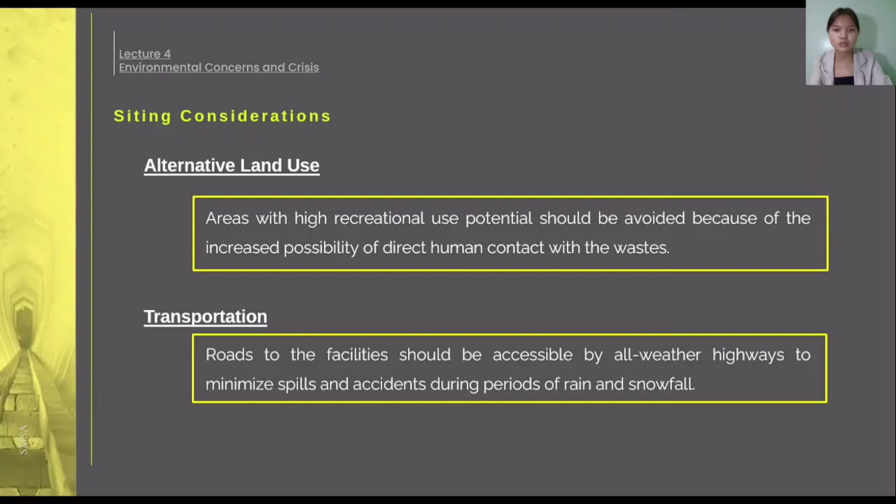In terms of socioeconomic factors, these range from public acceptance to long-term care and monitoring of the facility. First is public control over the opening, operation, and closure of the facility, public acceptance, and public education programs. Third is land use changes and industrial development trends. Fourth is user fee structures and recovery of project costs. And lastly, long-term care and monitoring.

Incinerators. Incineration is a controlled process that uses combustion to convert a waste to a less bulky, less toxic, or less noxious material. The principal products of incineration from a volume standpoint are carbon dioxide, water, and ash.

But the products of primary concern, because of their environmental effects, are compounds containing sulfur, nitrogen, and halogens. The solid ash products from the incineration process are also a major concern and must reach adequate ultimate disposal.

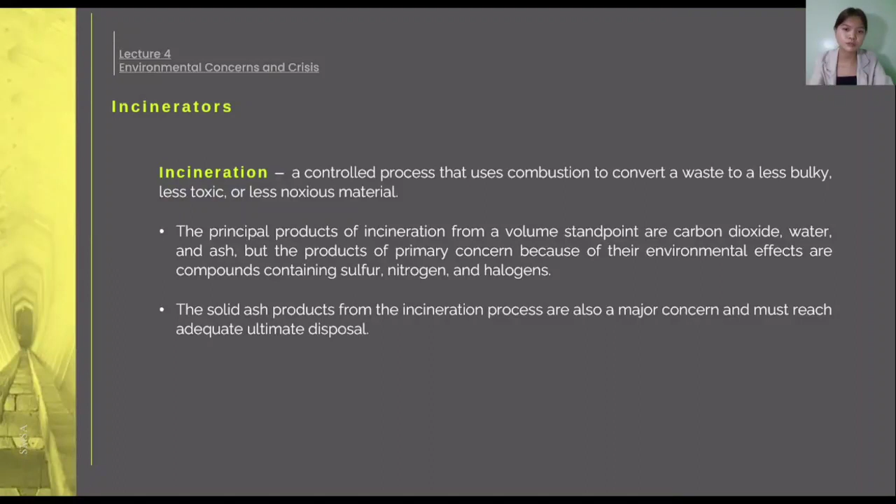There are several basic considerations in the design of an incinerator for a partially combustible waste. First, the waste material must be atomized as finely as possible to present the greatest surface area for mixing with combustion air. Second, adequate combustion air must be provided to supply all the oxygen required for oxidation or incineration of the organic present.

Third, the heat from the auxiliary fuel must be sufficient to raise the temperature of the waste and the combustion air to a point above the ignition temperature of the organic material in the waste.

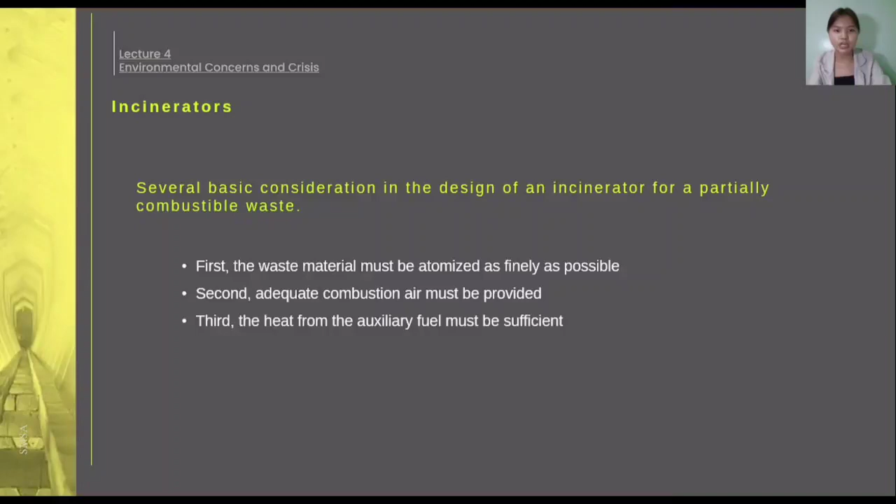Air emissions from hazardous waste incinerators include the common air pollutants. Inadequate incineration may result in emission of some of the hazardous materials that the incineration was intended to destroy.

TCDD is the most potent compound of its series, polychlorinated dibenzodioxins, known as PCDDs or simply dioxins, and became known as a contaminant in Agent Orange, a trichlorophenol herbicide product. The acute toxicity of TCDD in animals is extremely high. However, in humans, the evidence for these adverse effects is mixed. Although acute effects such as skin rashes and digestive difficulties have been observed on high accidental exposure, these are transitory.

Public concern has focused on chronic effects, but existing evidence for birth defects in humans from chronic TCDD exposure is inconsistent. Regulations governing incineration are designed to limit TCDD emissions to below measurable quantities. These limits may usually be achieved by the proper combination of temperature and residence time in the incinerator.

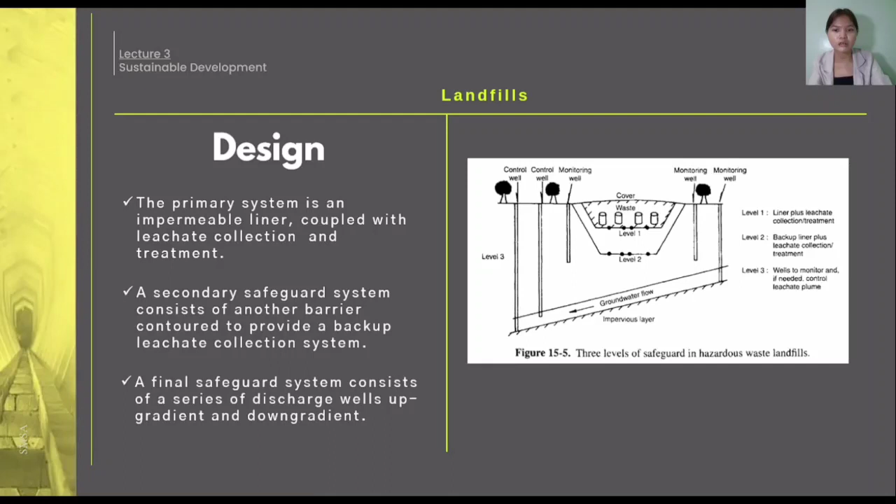Operation. As waste containers are brought to a landfill site for burial, specific precautions should be taken to ensure the protection of public health, worker safety, and the environment. Site closure. Once a site is closed and does not accept any more waste, the operation and maintenance of the site must continue.

Nuclear energy has effectively protected air quality since it generates carbon-free electricity. However, nuclear power causes a major environmental problem, such as the production of radioactive waste, and this radioactive waste is considered an environmental pollutant. It has brought many hazardous impacts not only to humans but also to the environment.

This chapter aims to discuss the interaction of ionizing radiation with matter, as well as the discussion of radionuclides and the environmental implications of nuclear energy production, which are the radioactive forms of elements that are accessible to humans in the environment. And also the impact of ionizing radiation on environmental and public health, and highlights the engineering options in managing and disposing of radioactive waste that are currently available. So in order to understand the concept of ionizing radiation, we are going to discuss first the concept of radiation.

So in the concept of radiation, a German mechanical engineer and physicist, Wilhelm Röntgen, discovered the X-rays at the end of 1895. In conducting various experiments, he created the modern understanding of ionizing radiation. The discovery of Röntgen was followed by the observation of Henri Becquerel, a French physicist, who observed radiation with similarities to X-rays derived from certain uranium salts.

And next is Marie and Pierre Curie. They studied radiation from pitchblende and chalcolite, which are uranium ores, and isolated two additional elements, radium and polonium, discovered and named by them. It is considered that the discovery and isolation of these radioactive elements marked the beginning of the atomic age.

According to the magnetic field's direction of deflection, radiation derived from radium and polonium was classified into three types: alpha, beta, and gamma. Note that the sources and effects of alpha, beta, and gamma, as well as neutron emissions, are essential, since understanding these is required to manage radioactive waste.

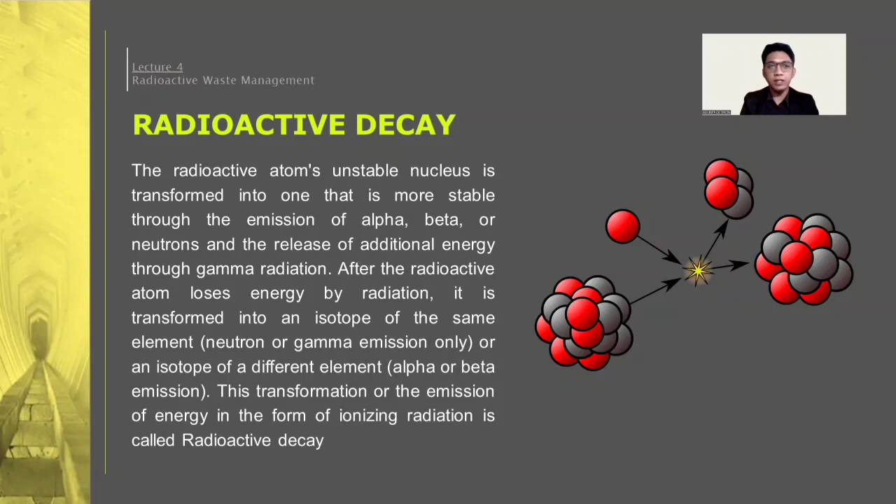This transformation, or the emission of energy in the form of ionizing radiation, is called radioactive decay. The rate of radioactive decay is also the rate of decrease of the number of radioactive nuclei, which can be expressed by a first order rate equation.

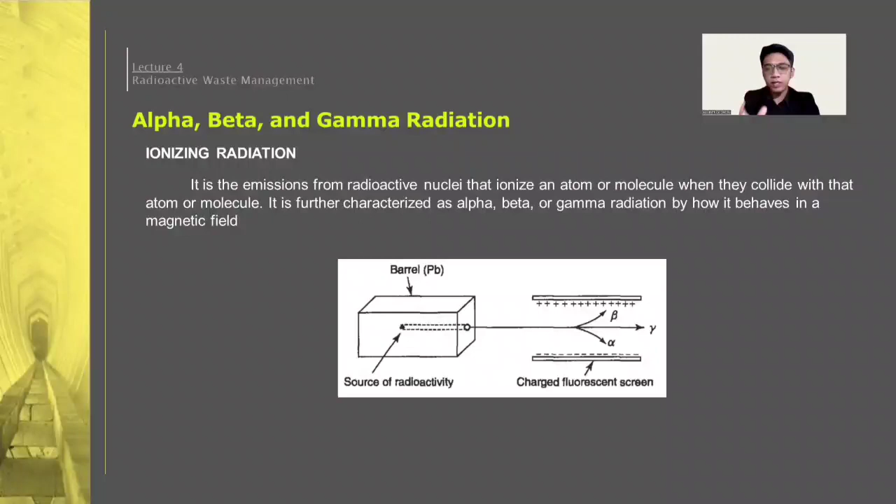The alpha and beta emissions are observed to have some mass and are considered particles, while the gamma emissions are photons of electromagnetic radiation which carry zero charge, zero rest mass, and travel at the speed of light. The alpha radiation is identified as helium nuclei. It poses no direct health risk as external radiation, because even the most energetic particles are halted by the epidermal layer of skin and rarely penetrate to more sensitive layers. When material contaminated with alpha-emitting radionuclides is eaten, inhaled, or absorbed inside the body, a health hazard will likely happen.

The beta radiation is a stream of electrons released at a velocity close to the speed of light. Interactions between beta particles and the atoms of pass-through materials are much less frequent than alpha particle interactions due to their lower mass. The slower rate of energy loss enables beta particles to move through air for several meters and human tissue for several centimeters. Internal organs are usually protected from external beta particles, except for exposed organs such as eyes. The assimilation of beta emitters into the body may also harm a person's internal organs and tissue.

The gamma radiation is similar to X-rays used in medicine, and this radiation is invisible electromagnetic radiation made of photons. The relaxation length determines the noticeably larger distance that gamma rays travel in all mediums. External doses of gamma radiation may produce significant human health harm since the dose is not greatly impacted by the passage of the radiation through the air.

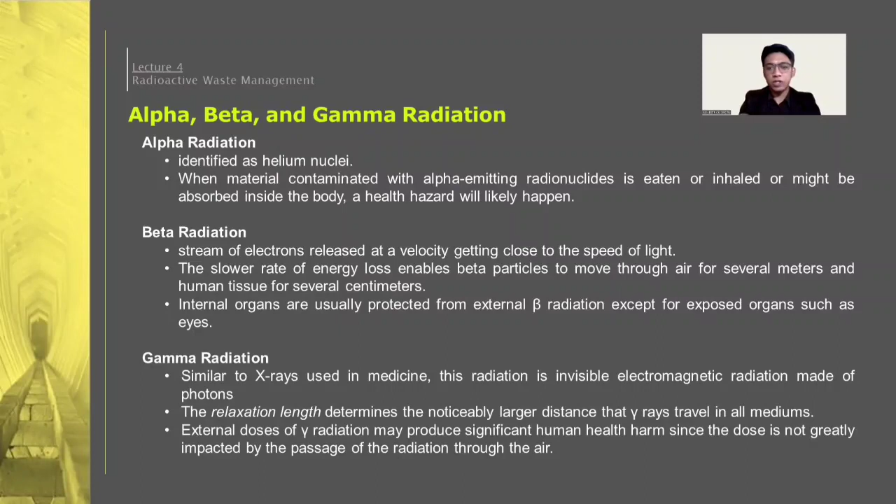For the units for measuring ionizing radiation: ionizing activity causes harm which can damage living organisms since it can alter molecules within the cells of an organism. The damage is based on the quantity of energy transmitted to tissue by collisions with alpha and beta particles, neutrons, and gamma radiation. Extreme exposure to ionizing radiation may cause eventual harm and heat damage to the skin or tissue.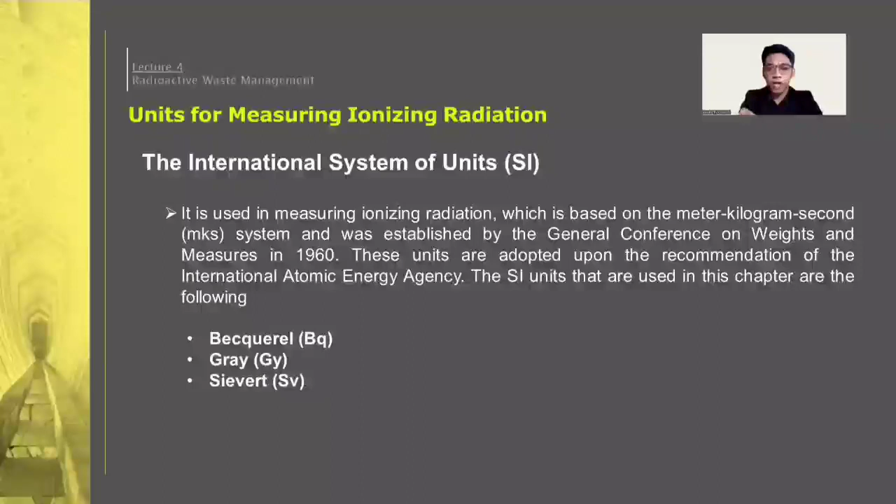The SI units used in this chapter are the becquerel, Bq, the gray, Gy, and the sievert, Sv. The becquerel is the SI measure of source strength or total radioactivity. It is defined as 1 disintegration per second, and the units of becquerels are inverse seconds. The source strength in becquerels is not enough for full characterization of a source. The nature of the radionuclide and the energy and type of emission are also necessary.

The gray is the SI unit which measures the amount of ionizing radiation needed to absorb 1 joule of energy per kilogram of absorbent material. Historically, radiation absorbed dose was measured in rad. 1 gray is equal to 100 rad. The absorbed radiation dose is measured in grays.

And lastly, the sievert is the SI measure of absorbed radiation dose equivalent. That is, 1 Sv of absorbed ionizing radiation does the same amount of biological damage to living tissue as 1 gray, Gy, of absorbed X-ray or gamma radiation.

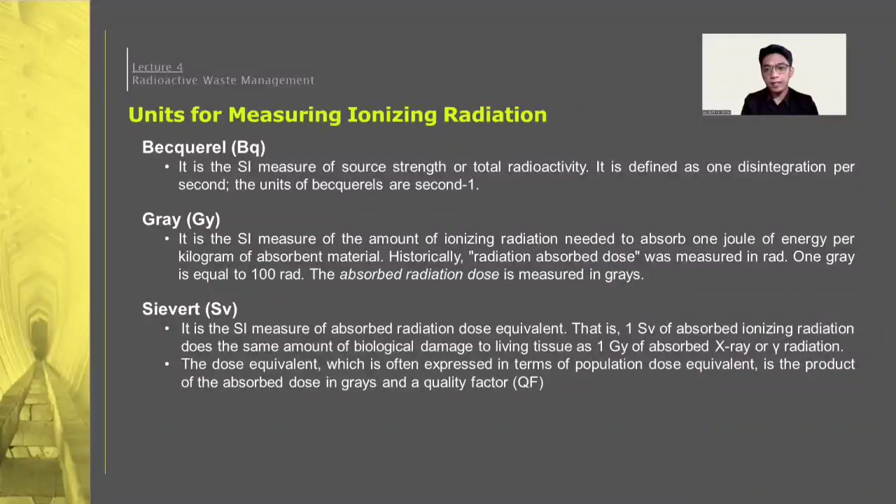The quality factors take into account chronic low-level exposures as distinct from acute high-level exposures, and the pathway of the radionuclide into the human body, such as inhalation, ingestion, dermal absorption, external radiation, as well as the nature of ionizing radiation.

For measuring ionizing radiation, there are 4 methods that are widely used to measure radiation dose rate and the quantity of radioactive material present. First is the particle counter, which is designed to detect the movement of single particles through a defined volume. Next is the ionization chamber, which consists of 2 charged electrodes that are used to collect ions produced by corresponding

electric fields. Next is the photographic film, which darkens after being exposed to ionizing radiation and serves as a sign of radioactivity. And lastly is the thermoluminescent detector, which are crystals that can be ionized to high electronic energy levels by radiation ionization.

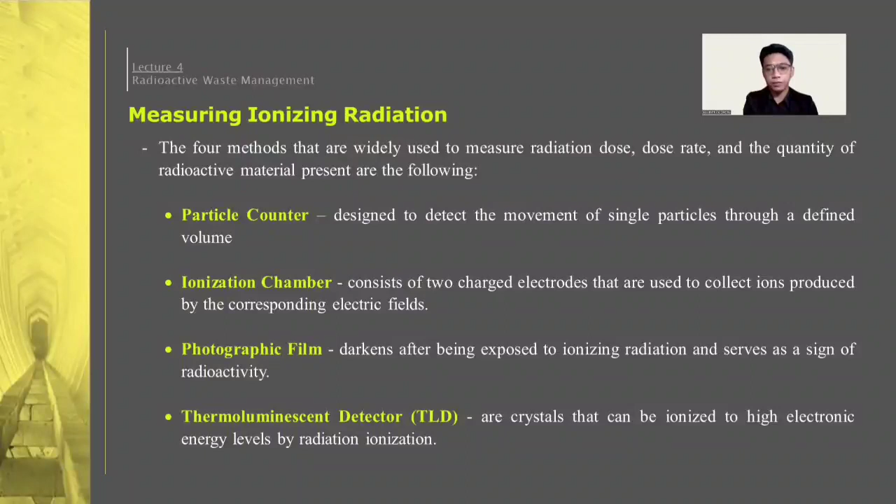Chemical bonds are disrupted and electrons are ejected from molecules along the path of ionizing radiation, causing damage, which is the process of ionization. The interactions between these electrons and tissue molecules are mostly responsible for the biological effects that follow. The energy transferred during these collisions and interactions per unit travel length through the tissue is what we call the linear energy transfer of the radiation. The intensity of the biological harm increases with the amount of ionization seen along the particle's travel.

Ionizing radiation can have somatic and genetic effects on living things. Somatic effects are consequences on individuals who have been directly exposed to the radiation that leads to sickness, such as circulatory system breakdown, nausea, hair loss, and sometimes death. And the genetic effects caused by radiation damage to chromosomes have been shown to be inheritable in animals, but

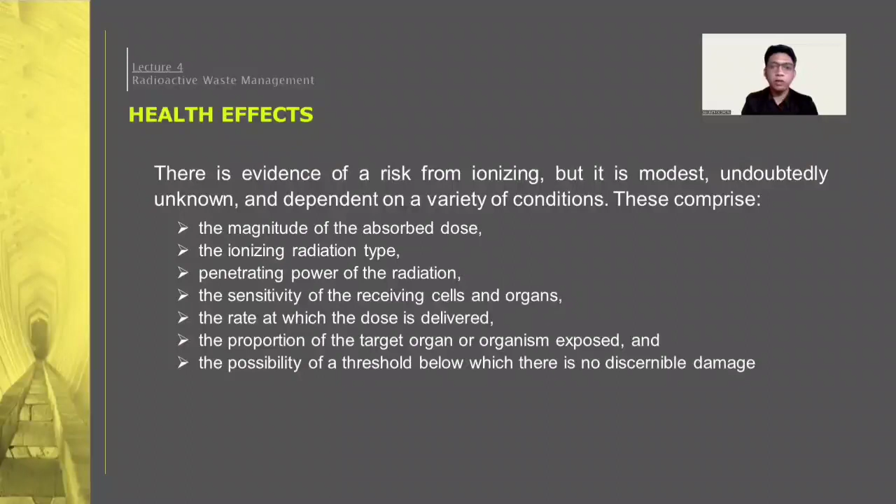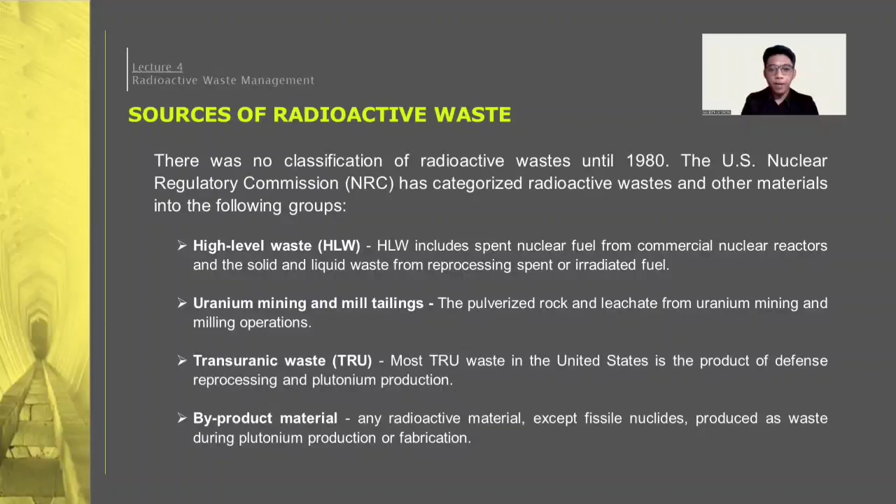The sources of radioactive waste. There was no classification of radioactive waste until 1980. The United States Nuclear Regulatory Commission has categorized radioactive waste and other materials into the following groups. First is the high-level waste. Next is the uranium mining and mill tailings, the transuranic waste, byproduct material, and low-level waste. The low-level waste includes everything that doesn't fall under one of the other categories.

The following kinds of low-level waste have been identified by the NRC to ensure proper disposal. First is Class A, which contains only short-lived radionuclides and must be chemically stable. Next is Class B, which has higher levels of radioactivity and needs to be physically stabilized before transportation or disposal. Next is Class C, which is waste that will not decay to acceptable levels in 100 years and requires isolation for 300 years or more.

And greater than Class C, or GTCC, which will not decay to acceptable levels in 300 years. Next, the mixed low-level waste. It is a low-level waste that contains hazardous waste as classified under the Resource Conservation and Recovery Act. And lastly is the Formerly Utilized Sites Remedial Action Program.

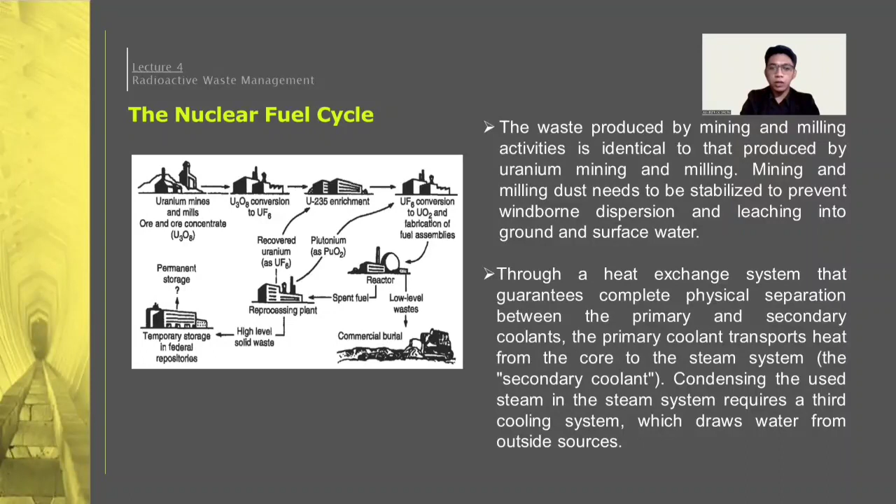For the reprocessing waste and other reactor waste, the term reprocessing refers to the entire process of extracting fissile material from irradiated fuel. Despite the fact that the special nuclear material is no longer being produced or extracted, the very large quantities of neutralized acid solvent sludge and the organic extraction solvents used contain high concentrations of radionuclides and are classified as high-level waste.

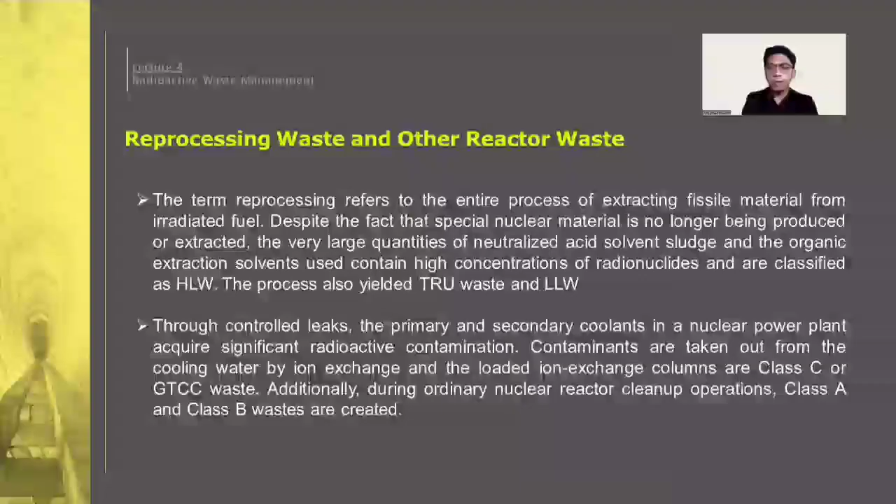Through controlled leaks, the primary and secondary coolant in a nuclear power plant acquire significant radioactive contamination. Contaminants are taken out from the cooling water by ion exchange, and the loaded ion exchange columns are Class C or GTCC waste. Additionally, during ordinary nuclear reactor cleanup operations, Class A and Class B waste are created.

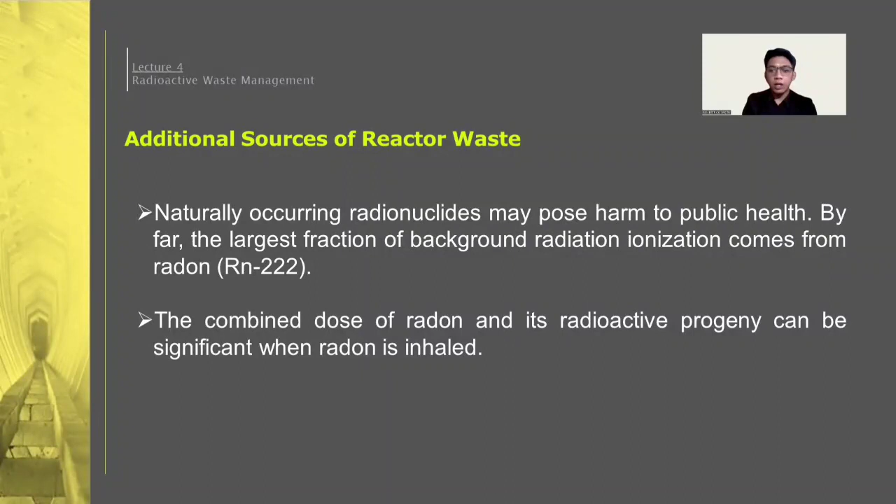For additional sources of reactor waste, the increasingly widespread use of radionuclides in research, medicine, and industry has created a lengthy list of potential sources for radioactive waste. Naturally occurring radionuclides may pose harm to public health. By far, the largest fraction of background radiation ionization comes from radon. The combined dose of radon and its radioactive progeny can be significant when radon is inhaled.

For radioactive waste management, the objective of the environmental engineer is to prevent the introduction of radioactive materials into the biosphere, and particularly into the environment accessible to human activity, for the effective lifetime of these materials. Next, the control of the potential direct impact on the human environment is necessary but not sufficient, because radionuclides can be transmitted through water, air, and land pathways for many years and even for generations. Due to technological, political, and economic variables outside of their control, engineers in charge of managing radioactive waste must concentrate on long-term storage options or disposal.

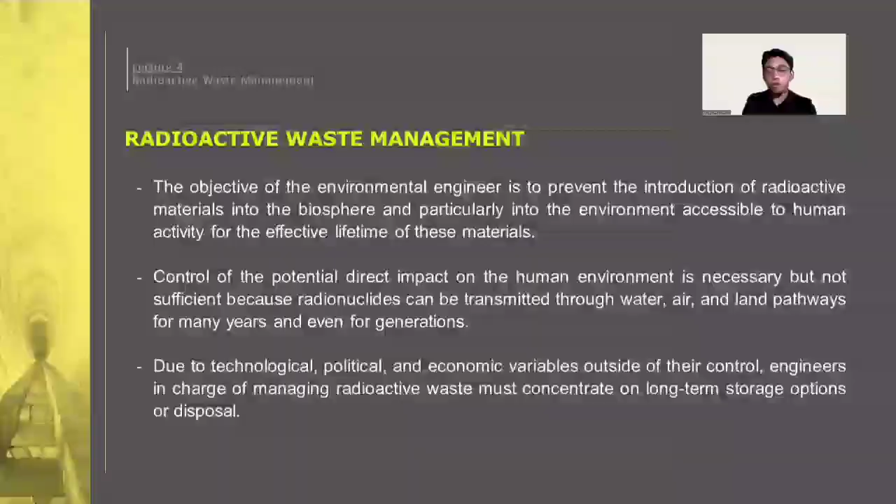For high-level radioactive waste, a two-stage barrier system was developed by the U.S. Geological Survey in 1979 to minimize the leakage from the repository and dispersal of high-level radioactive waste to the environment. First is the waste form itself. This is the first barrier, which is radioactive material dissolved and dispersed in a glass matrix. The second barrier is the geologic rock formation itself.

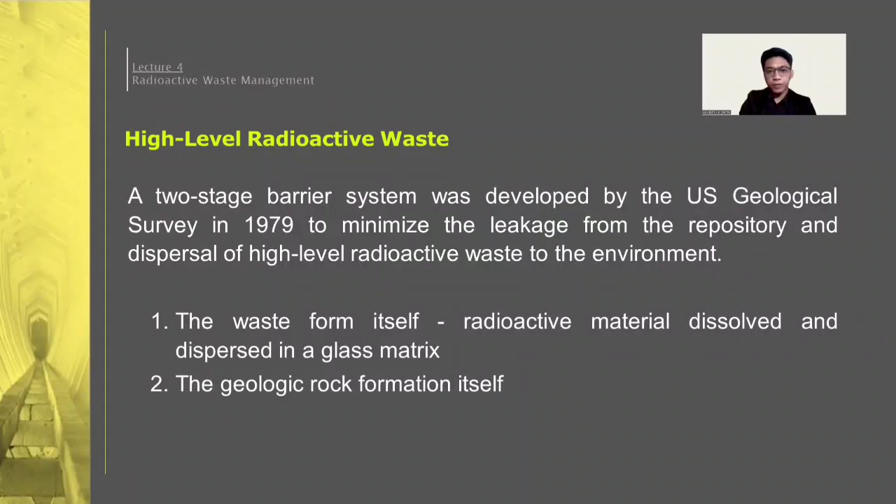For low-level radioactive waste, commercial low-level waste, in contrast to high-level waste, has been under the control of the private sector since 1960. It has been disposed of without any treatment at all. The low-level waste is now being treated using methods such as impermeable packing, compaction, burning, and stabilization in an asphalt or cement matrix.

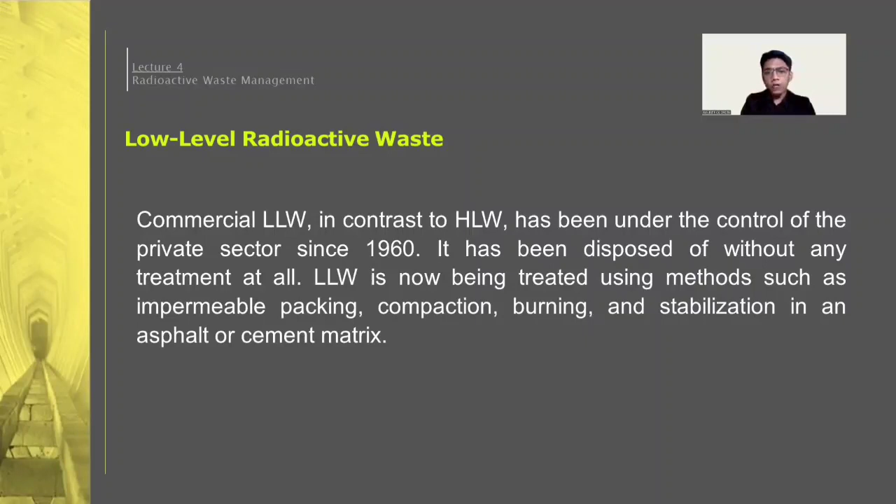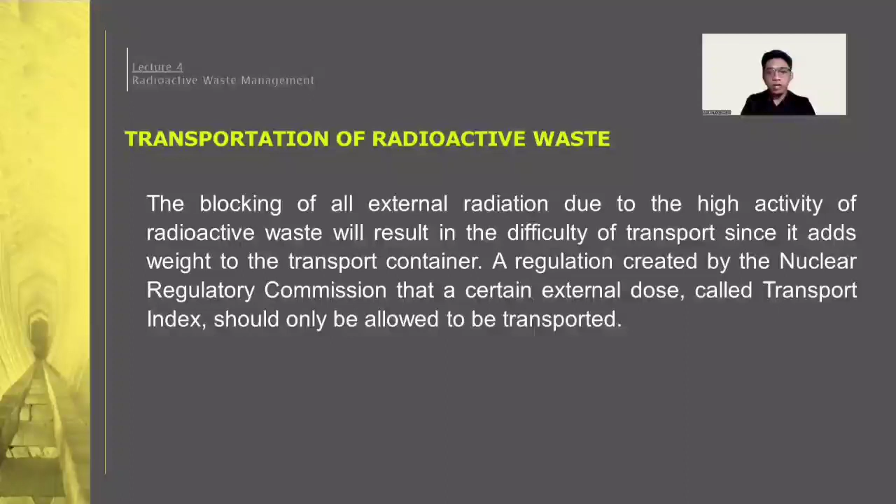For the transportation of radioactive waste, blocking all external radiation due to the high activity of radioactive waste will result in difficulty of transport, since it adds weight to the transport container. A regulation created by the Nuclear Regulatory Commission states that only a certain external dose, called the transport index, should be allowed to be transported. The container for the majority of the low-level waste must have undergone testing and certification to be able to resist the physical strains of standard transportation. The container must be able to survive specific accident conditions, including mixtures of fire and mechanical stress, for the high-level waste, the transuranic waste, and some of the low-level waste.